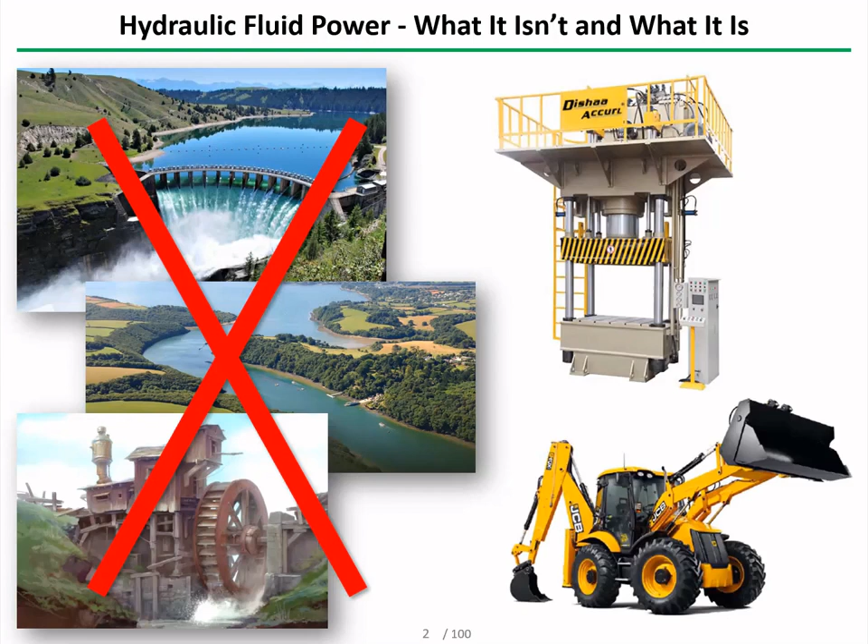Also, of course, in mobile applications, we've got things like JCBs and other diggers, we've got combine harvesters, we've got forklift trucks and so on. So it's the transmission of power, basically, which is why I tend to call it hydraulic fluid power rather than just hydraulics, to avoid any possible confusion.

So where did it all start? Well, I guess we can go back really to the ancient Greeks, the guy called Ctesibius, who was working in Alexandria in Egypt a couple of centuries BC.

And he was the guy who really invented what we call the positive displacement pump, or piston pump, as it's known today. Basically, he had two wooden pistons reciprocated by a hand lever inside two bronze cylinders. And by means of some leather flap valves on the inlet and the outlet of the device, he got a more or less constant flow of fluid out of the nozzle.

And then if we move on a couple of millennia, or a millennia and a half, Leonardo da Vinci got pretty close to describing hydraulic systems, but he had so many ideas and so many inventions up his sleeve that he didn't really have time to pursue it.

And then in Holland, Simon Stevin, around about 1586, really defined what we mean by hydrostatic pressure in a fluid and explained how it varied with the depth of the fluid.

But it was really down to the French philosopher Blaise Pascal in the middle of the 17th century, who stated that pressure is transmitted undiminished throughout a fluid and acts with equal force on equal areas at right angles to the areas. So basically what he was saying is that pressure can go around corners, if you like.

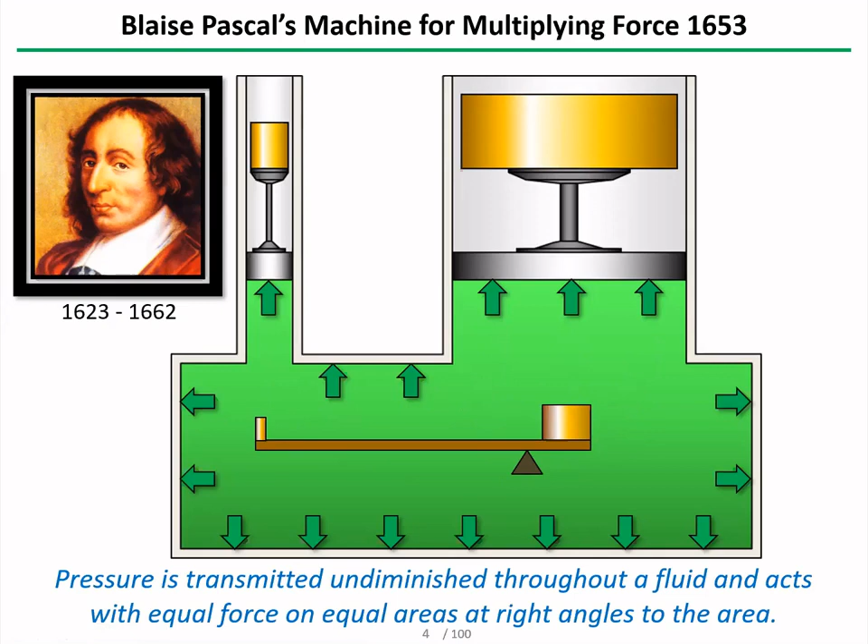So what he'd done basically was to explain the hydraulic equivalent of a mechanical lever. We can do exactly the same thing if we have a small weight acting on a long lever arm that can balance a much larger weight acting on a small lever arm. So that became known as Pascal's law, say in the middle of the 17th century.

Why it took quite that long is a bit of a mystery. Obviously, there were practical problems to overcome, such as the sealing of the pistons and this sort of thing. But they weren't enormous problems because, as we said, pumps had been made before with sealing leathers and so forth.

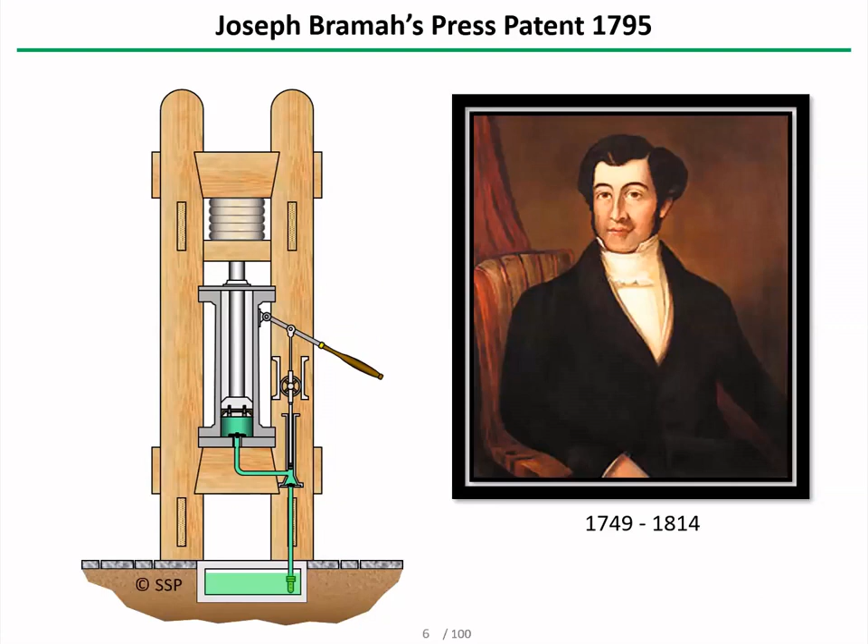But as we said, it was really Joseph Bramah who kicked off the whole hydraulic industry when he patented the first press in 1795. And to illustrate his press illustration, he used a pump piston diameter of 1/4 of an inch, acting on a larger piston in the center of the press, which is a 12-inch diameter piston, plus a bit of mechanical advantage from the lever on the press pump.

And he reckoned he could get an output from this press of just over 2,300 tons, which was pretty impressive from a wooden press. And if you work out the sums, that works out to a pressure of 46,000 pounds per square inch.

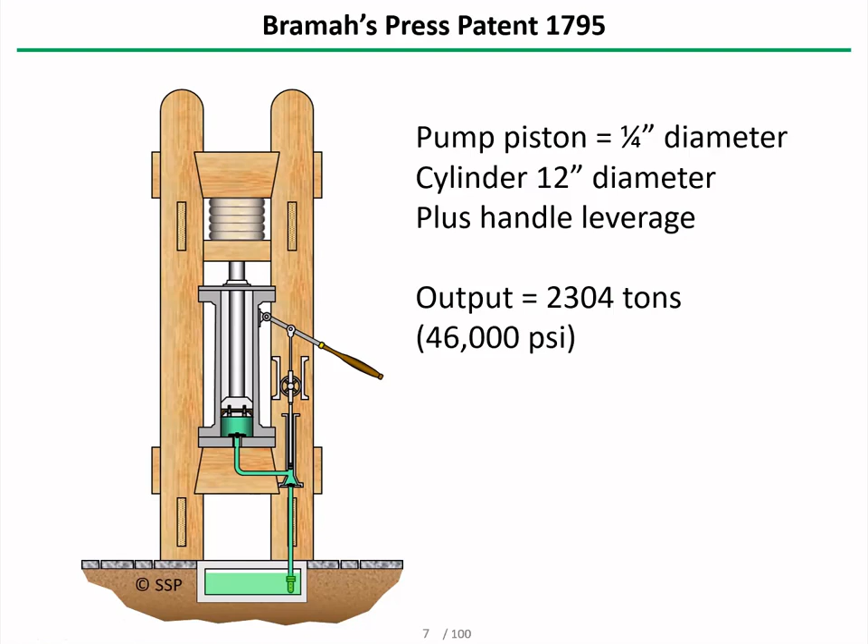Well, just to put that into perspective, the first aeroplane to use a hydraulic system at 5,000 psi was the Airbus 380, which first flew in 2005. Up to then, all aircraft had been using 3,000 psi systems. So for the very first hydraulic machine to use a pressure of 46,000 psi was perhaps a tad ambitious. But nevertheless, it was just an illustration in his patent application.

But probably more importantly, in the same patent application, Bramah illustrated another use of hydraulic fluid power, which was not just for force multiplication, but to actually transmit power over a distance. He illustrated a simple arrangement with a hand pump and a cylinder ringing a bell. And that really is the main use of hydraulic fluid power today, as a power transmission medium rather than just a force multiplier.

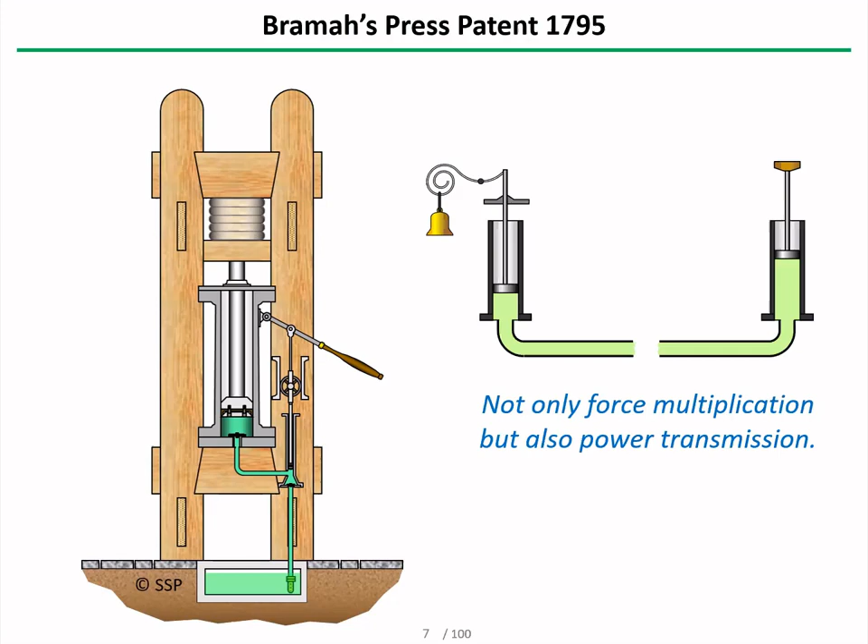In the early days of hydraulic fluid power, it was used in presses for squeezing things together, such as baling cotton, wool, hay and so forth, and later on for forging metals, as we'll see.

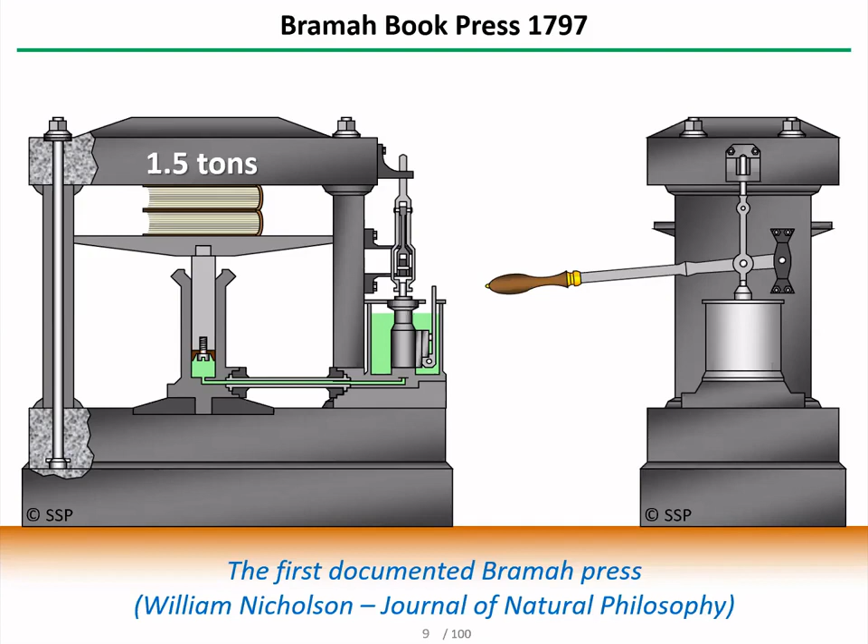A couple of years after his patent, in 1797, we know this was one of the first presses that Bramah actually made. His patent illustration was probably no more than that, just an illustration, but this one is documented in a book by William Nicholson. It's a much more modest affair than his 2,300 ton press - a 1.5 ton press used in the book manufacturing industry for pressing books together. Made out of cast iron, no doubt, rather than wood, but a much more modest machine to start off the whole industry, really.

These days, of course, you can dip down to Halfords and for 16 quid buy yourself something very similar to that, which works on exactly the same principle - just a simple little bottle jack with a hand pump, using exactly the same principle that Bramah used in his early presses.

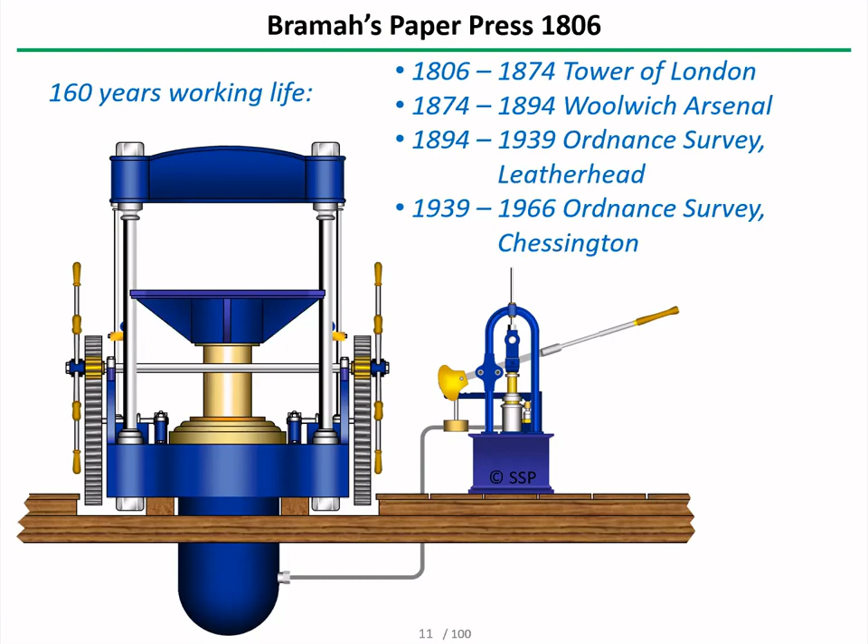We know quite a lot about this press because it still exists. It's been preserved, and it's now exhibited in the Kelham Island Museum in the middle of Sheffield. So it's not actually functioning, but it's still in good condition on display in that museum, which is well worth a visit if you're ever up that way, because they've got some impressive other things to look at as well.

When Bramah's patent ran out, everybody else seemed to jump on the bandwagon. Matthew Murray, for example, up in Leeds, came up with this double acting press, using basically a rack and pinion arrangement to get movement on both the top and the bottom platens, to save a little bit of time in the pressing process.

Also, downstroking presses came along as well. The advantage here is that you didn't have to lift up your bales of hay or wool or cotton, whatever it is you were compressing, up onto the top platen - you could do it more or less at floor level. But because cylinders were only single acting at that stage, you then had to find some way of retracting the piston at the end of the working stroke of the press. In this particular case, it was done by counterweights on either side of the press platen.

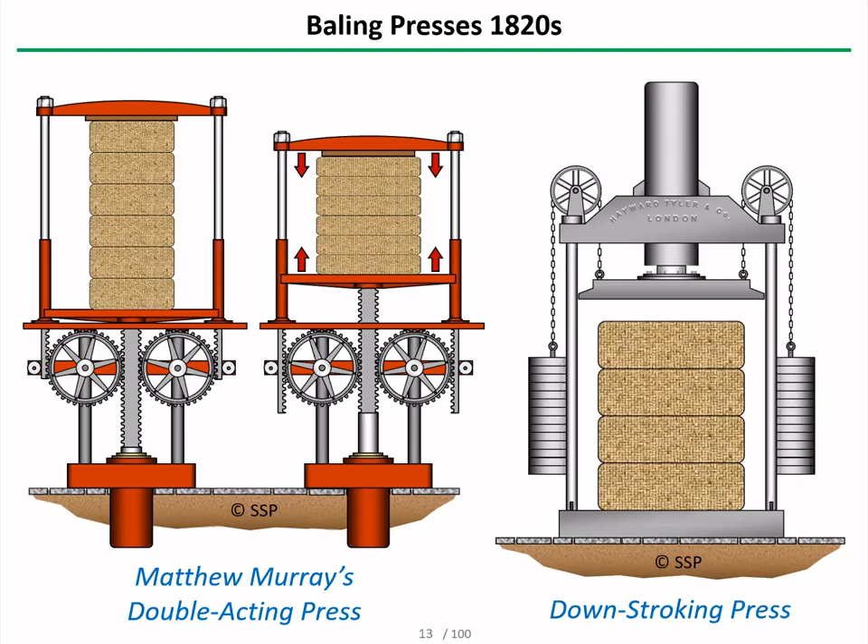So this was the other main use for hydraulic presses at that time - apart from baling up cotton and hay, extracting oil from seeds, where it was a more or less continuous process. Rather than having a poor chap pumping away on a hand pump all day long, they tended to connect the pump to an overhead line shaft so that they could mechanize the whole process, if you like.

This illustrates it a little further, where they've taken standard hand pumps, connected via a connecting link to an eccentric on the overhead line shaft, and got the whole process mechanized to be more efficient.

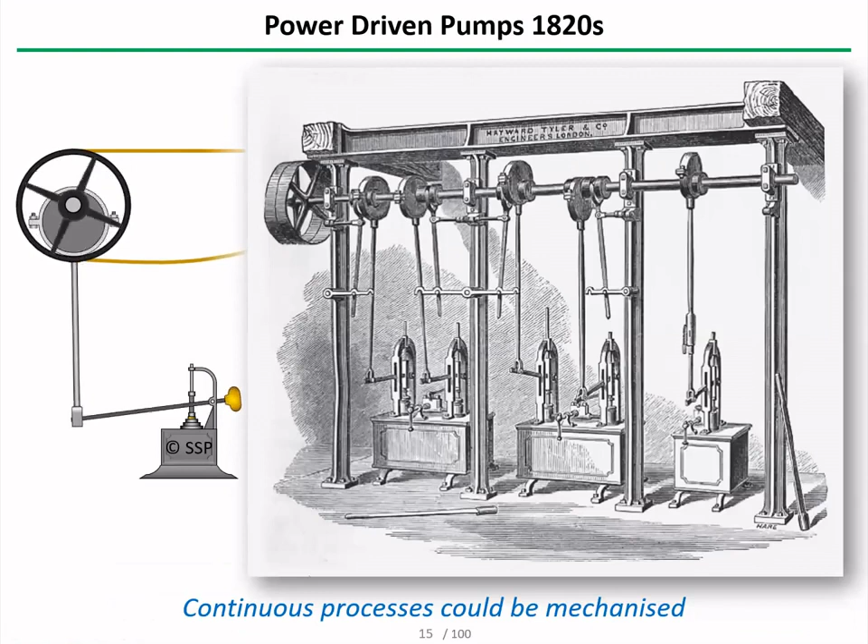Quite an interesting application came up in America with a guy called Joseph Francis. Wooden boats tended to dry out in the sun over time, so the planking shrank, and the first time you put the boat into the water, it tended to leak like a sieve - not one of the attributes you're looking for on a lifeboat.

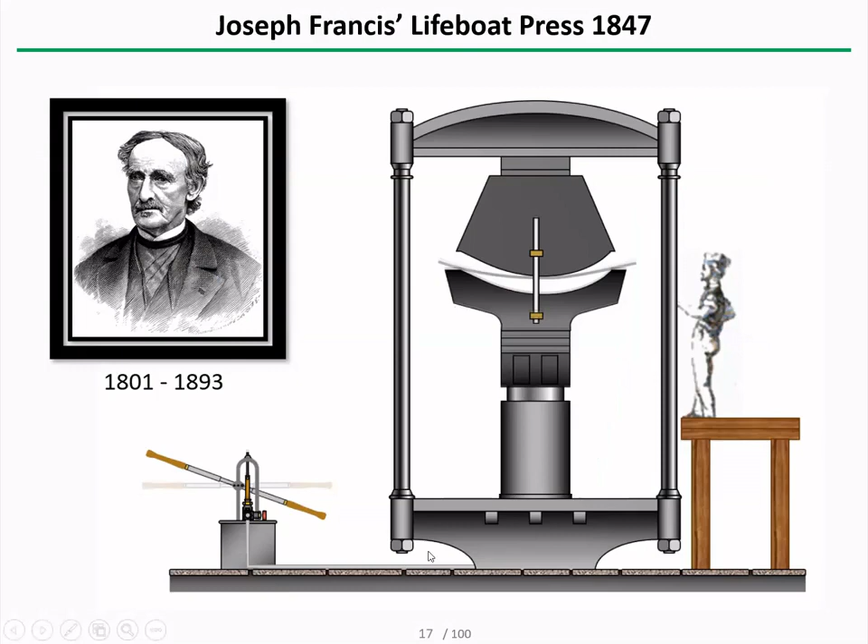So he came up with the idea of using a metal one, a corrugated iron lifeboat, made in a hydraulic press using a male and female mold, two halves operated by hand pump. The boat was made in two halves, then riveted together, giving him a lighter lifeboat that didn't dry out and leak.

Later on, things got a bit heavier, and in the forging of crankshafts for large steam engines, the Scotsman James Nasmyth came out with the steam hammer, basically a bigger version of the blacksmith's hammer. He used a steam cylinder at the top to lift a heavy weight, then with assistance from steam pressure, it came thumping down onto the component being forged.

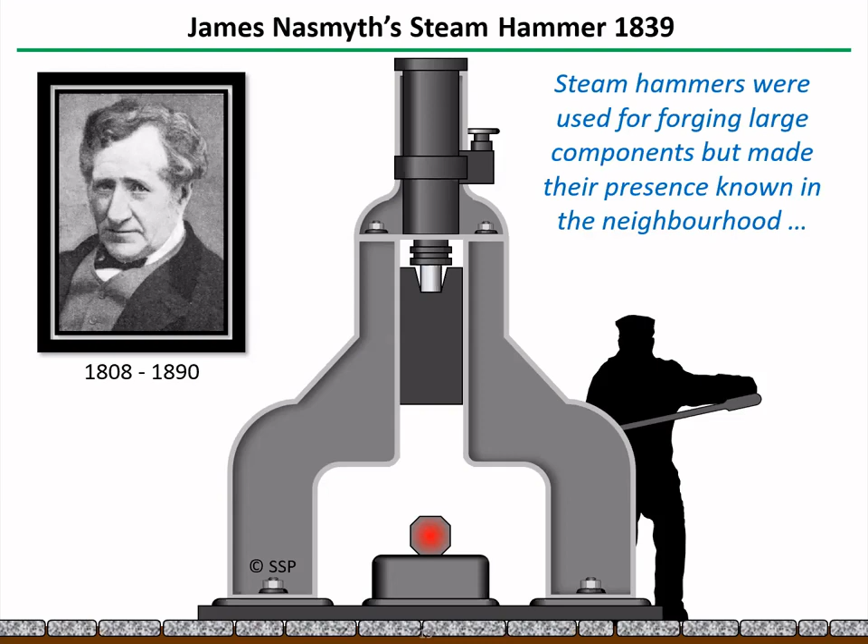You can imagine these things made their presence known in the neighborhood, with a 3 or 5 ton weight bashing down on a heavy forging several times a minute - then you knew the machine was operating. Especially at that sort of size, the largest steam hammer produced was a 125 ton version over in the States.

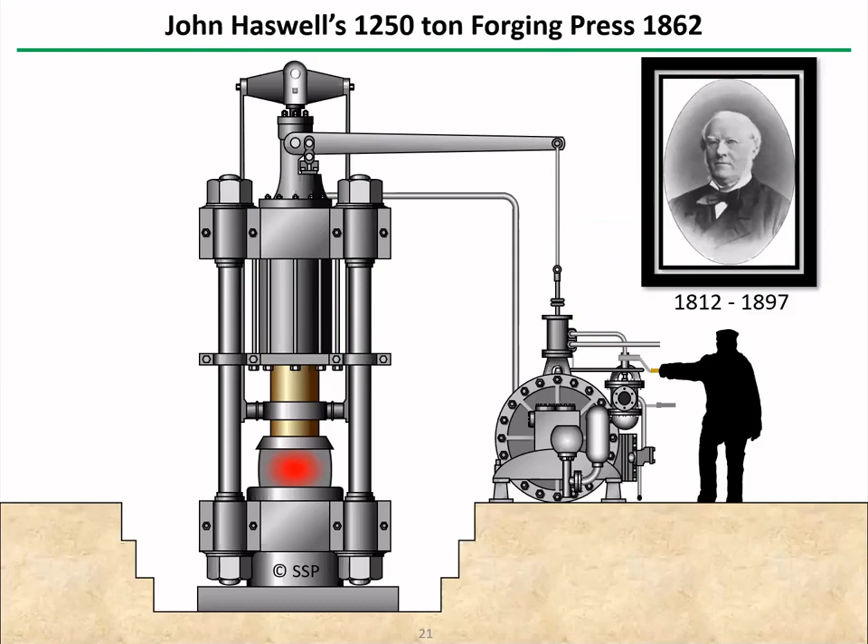So a guy called John Haswell came up with the idea of using hydraulics for the forging process. In conjunction with the Kirkstall Forge Company up in Leeds, he designed the first hydraulic open forging press in 1862, which instead of hitting the workpiece with repeated hammer blows, gave a nice steady squeeze to the component, giving a better quality forging and being less intrusive on the neighborhood.

In fact, it was stated that a lady in a muslin dress could stand close to it and incur no risk. These days, of course, the lady would also need a hard hat, high-vis jacket and safety boots as well. But there you are.

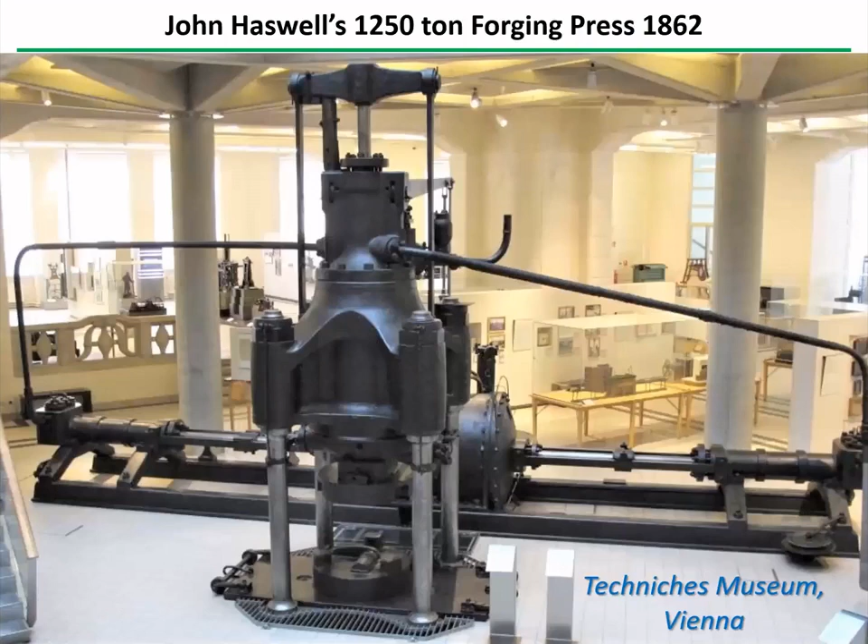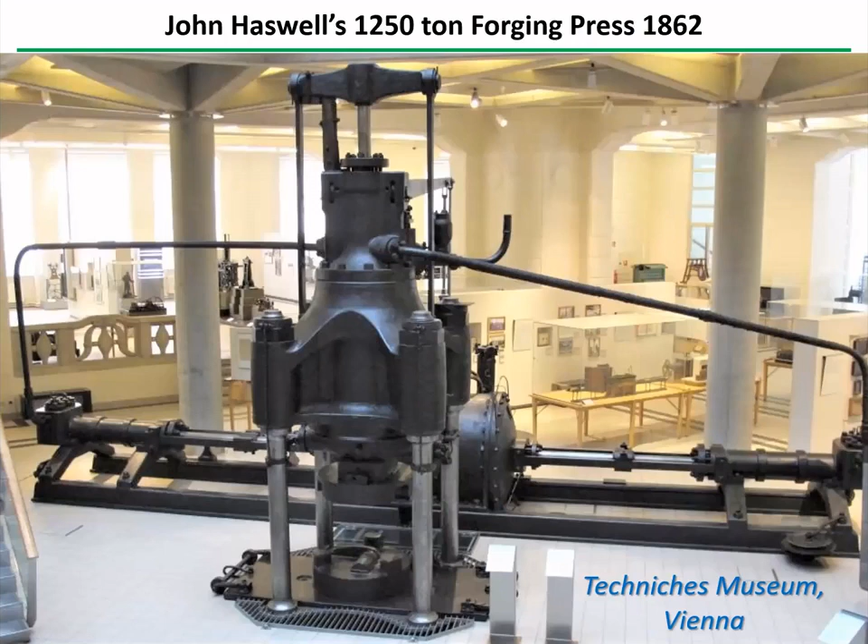We know quite a bit about Haswell's press because it still exists. He moved on to become superintendent of works for the Austrian railways, so he took his press with him, and it ended up in the Technisches Museum in Vienna, where it still resides.

The biggest press in the world today is one in China - an 80,000 ton die forging press, so not something you want to get your finger caught in. It's a huge machine, weighing 25,000 tons and absorbing something like 42,000 horsepower, operating over a pressure of just over 9,000 psi, with 5 main cylinders and 25 auxiliary cylinders for doing different things on the press. The compressed volume is something like 500 gallons.

That's not the volume of fluid in the press itself - it's the extra volume you have to squeeze in to build it up to 9,300 psi due to the compressibility of the fluid. People tend to think of fluids as incompressible, but they're far from it. In this case, you can squeeze an extra 500 gallons in, and in the process, the massive columns of the press stretch by over an inch. So it's a pretty hefty affair.

In fact, if you turned the whole thing upside down, you could quite easily lift the weight of the new Queen Elizabeth aircraft carrier together with a Type 45 destroyer placed on its deck. So, as we said, it's a pretty hefty piece of equipment.

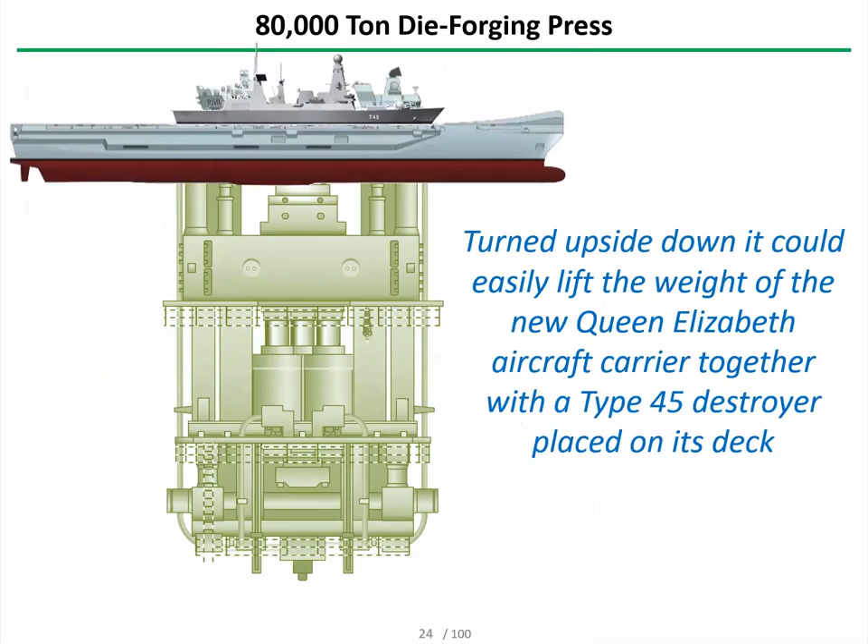As well as using hydraulics for presses, it was also employed for other uses, in particular for cranes. Bramah himself had designed and developed a workshop crane not long after his initial patent, using a rack and pinion arrangement with a hydraulic cylinder turning a winch drum for lifting components in his own workshop.

He stated it could raise and lower its load 15 or 20 times a minute to a height of 18 to 20 feet. If you do the sums, that works out to an operational speed of something like 13 feet per second, and probably sounds as feasible as his 2,300 ton wooden press.

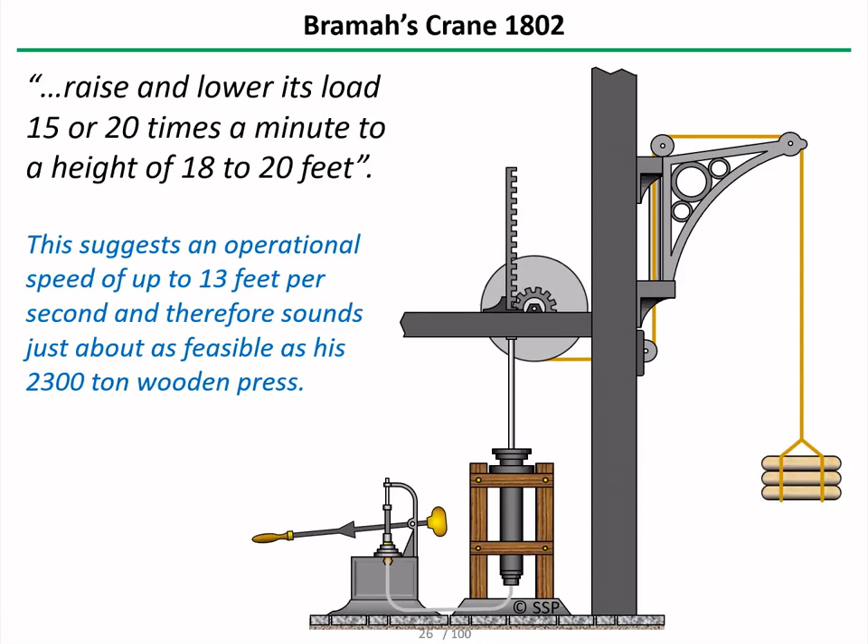So he was obviously a bit of an advertising man, was Joseph Bramah as well.

The man who really developed the hydraulic crane was William Armstrong up in Newcastle. This is really what set him off and became a huge business by the end of the century. He developed what's called the hydraulic jigger, basically a series of pulleys attached to a hydraulic cylinder, operating in the opposite way to a block and pulley. He uses the high force output of a hydraulic cylinder and multiplies the movement using the pulley wheels to get a larger movement out of the end of the crane.

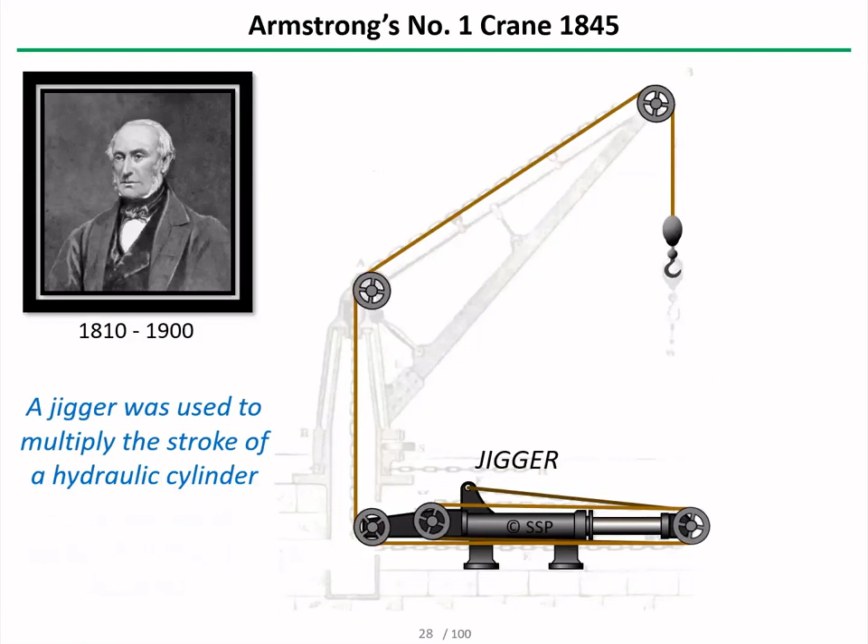Jiggers were also used on what's generally considered to be the first hydraulic excavator, developed by a guy called John Aird in 1882. It was used during the hydraulification of Hull's docks. I'm not quite sure if hydraulification is a word, but if electrification is, then I don't see why hydraulification shouldn't be.

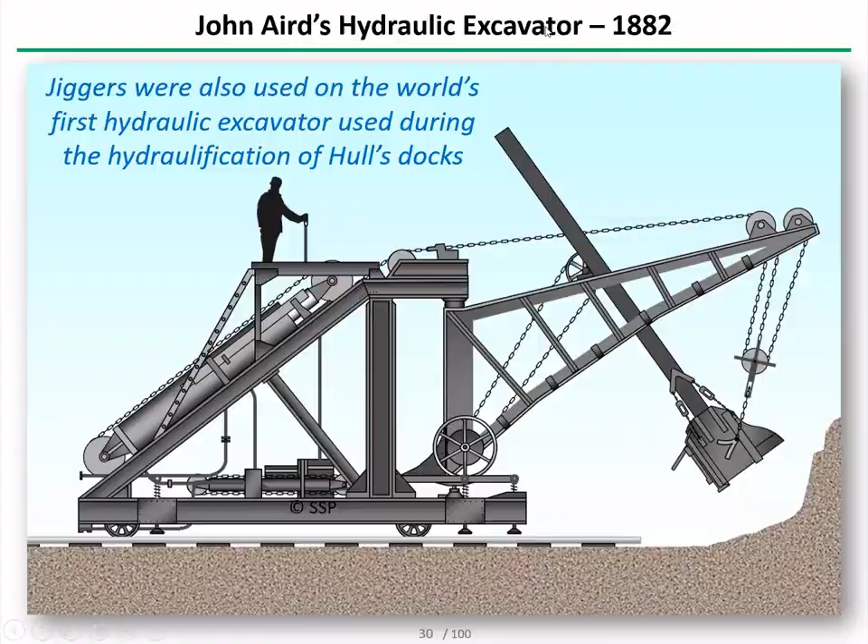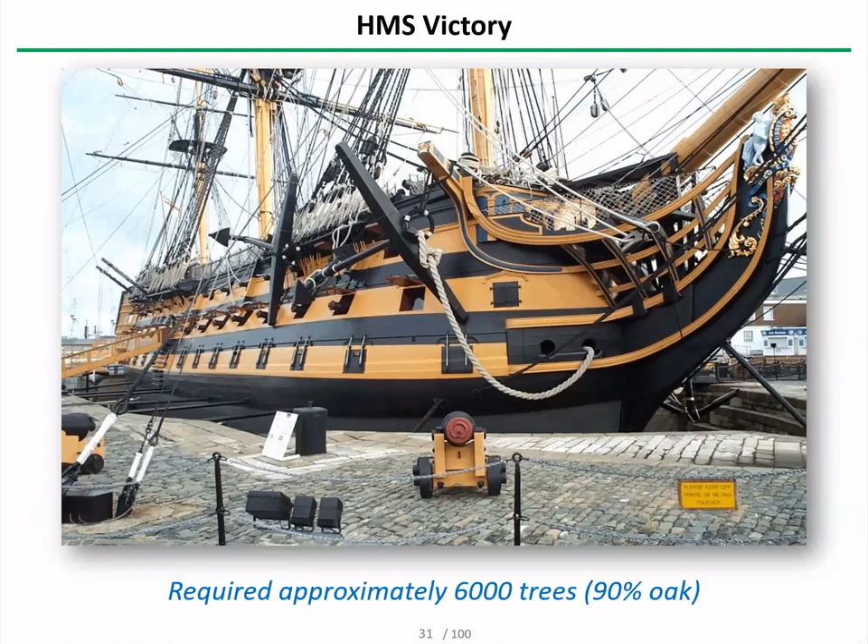You probably recognize that ship. If you don't, the title of the slide gives you a bit of a clue. But to build a big battleship like HMS Victory, it took something of the order of 6,000 trees, of which 90% were English oak trees. So it was a big requirement for wood in the end of the 18th century for shipbuilding.

And Bramah had the idea that, rather than chopping down the oak trees, which left a big stump in the ground and hindered the replanting process, why not just pull them up by their roots? He wasn't just talking about pushing them over, as we've illustrated here, but actually manually, bodily lifting the tree out of the ground by its roots.

And if you do the sums again, you'll find that he could well have done that. He had enough hydraulic force to actually bodily lift a tree out of the ground, and therefore not only provide more wood in the process, but clear the ground ready for replanting.

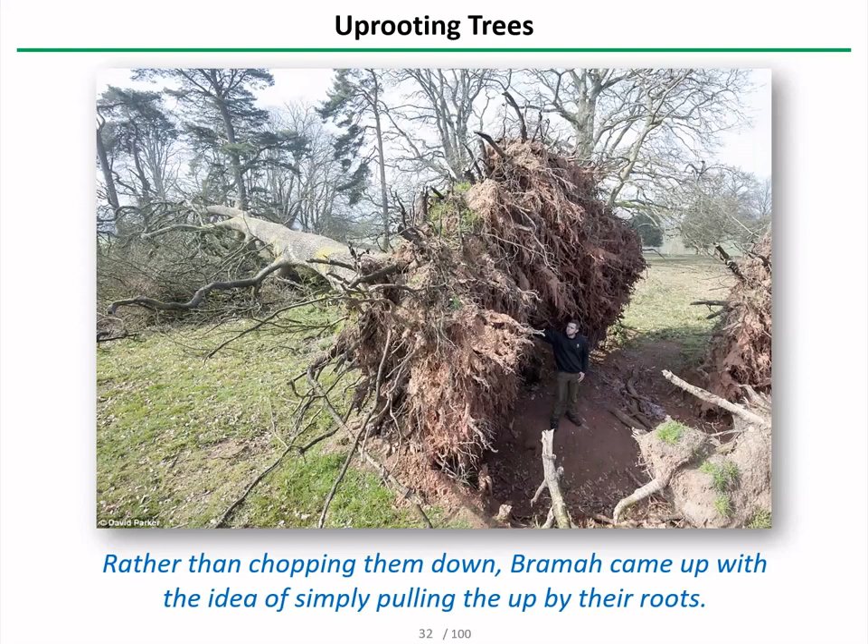The only problem is we don't know how he did it. There was a fire in Bramah's factory in 1843, and a lot of his early records were lost in that fire. So there is no record remaining, that I've been able to find at least, of exactly what this machine looked like for pulling trees out of the ground by their roots.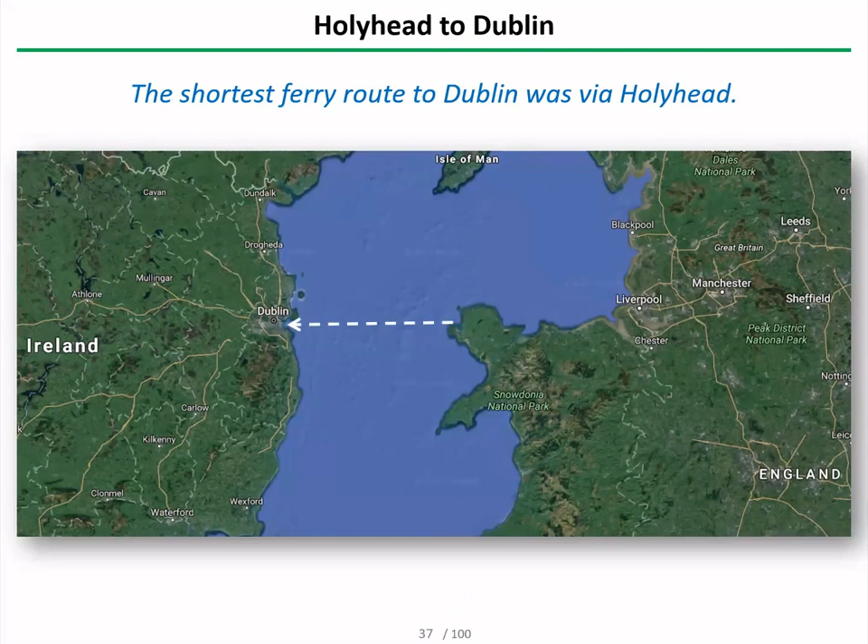Okay, so moving on to bridges. What's hydraulics got to do with bridges? Well, before we had air travel, if you wanted to travel from the mainland of Britain over to Dublin, the way you went was via sea from the port of Holyhead. And as you probably know, Holyhead is on an island. To get to the island, you have to cross a very narrow stretch of water called the Menai Strait.

Well, Thomas Telford had built a road bridge across the Menai Strait in 1826. But when they wanted a rail bridge, they thought that a suspension bridge probably wouldn't be stiff enough to carry rail traffic. So Robert Stephenson of railroad fame was engaged to design a rail bridge. After much deliberation and trial and error, he came up with basically what was the first box girder bridge, using a rectangular section tube strengthened by compartments top and bottom, and supported along the way by stone piers.

Each of the four central tubes was 460 feet long and weighed something like 1,500 tons by the time it was fully assembled. So you've got an up line and a down line, as you can imagine here.

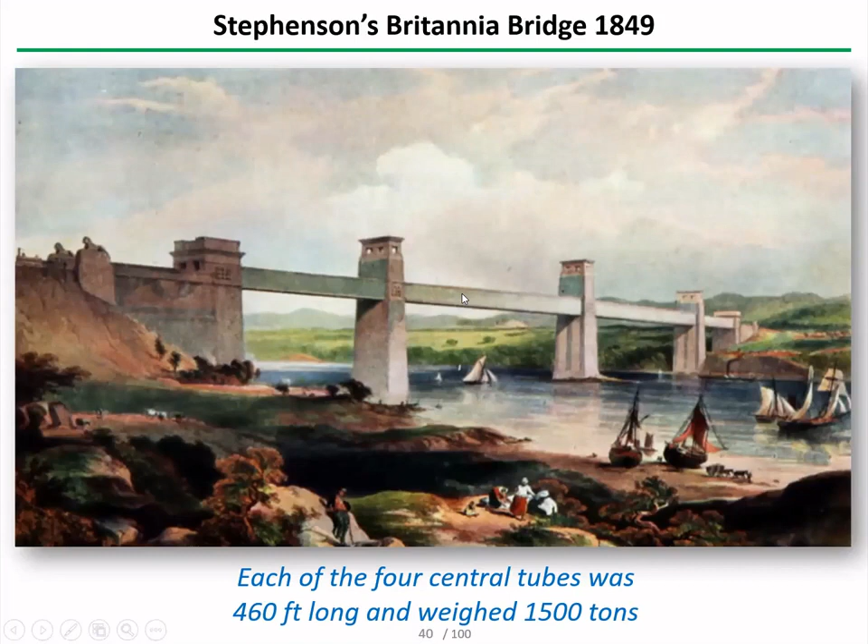They're fabricated on the shore because the Admiralty wouldn't let them put up scaffolding to impede the progress of ships through the strait for any length of time. So they were constructed on the shore in wrought iron sections being riveted together. They were then floated out on a couple of pontoons and then dropped onto specially built ledges built into the towers.

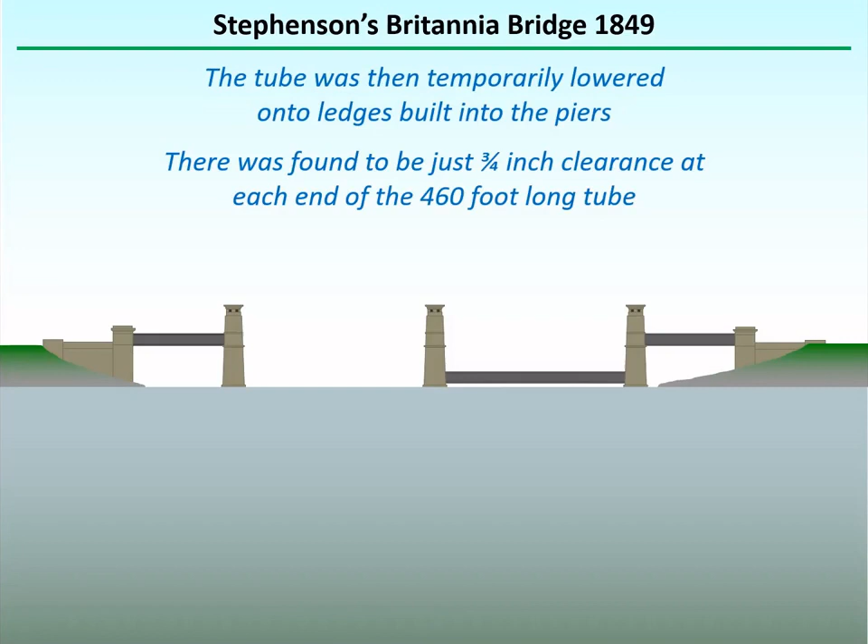When they dropped them onto the ledges, just as an indication of the sort of clearances that the Victorian engineers worked to, they found that over the 460-foot length of the tube, they had just 3/4 of an inch clearance at each end. So they were used to working to pretty close tolerances.

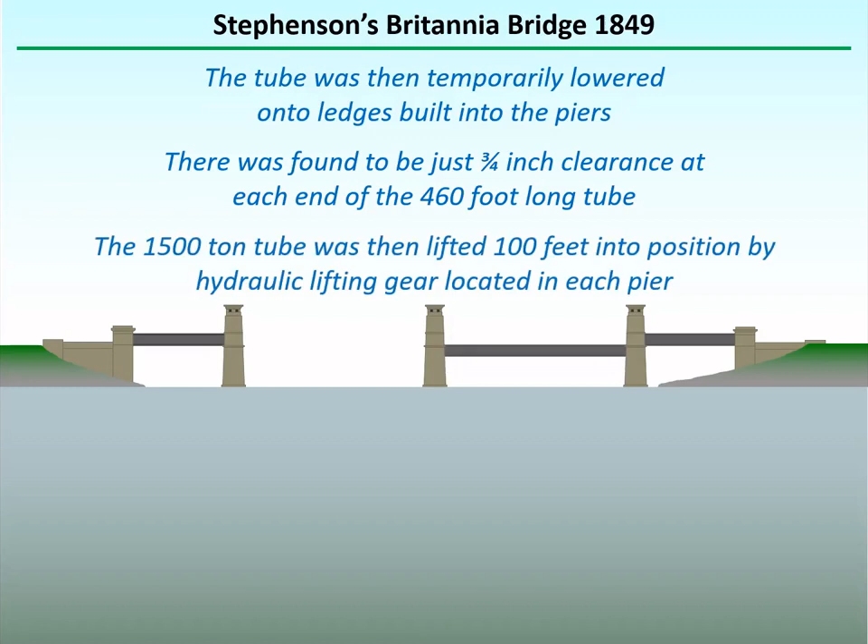All they had to do then was to lift the tubes up into position 100 feet above the high water mark. Again, they did that using hydraulic power. Each 1,500-ton tube was lifted 6 feet at a time by a big hydraulic cylinder, where each lift took about 45 minutes, pumps being operated by 2 steam engines.

The cylinders were pretty massive components. The ram diameter, the piston diameter in the cylinder was something like 20 inches and had a wall thickness of something like 11 inches, weighing a total of 16 tons. In fact, when they took them out of the mold, it took 3 days for the cylinder casting to cool down before they could machine it.

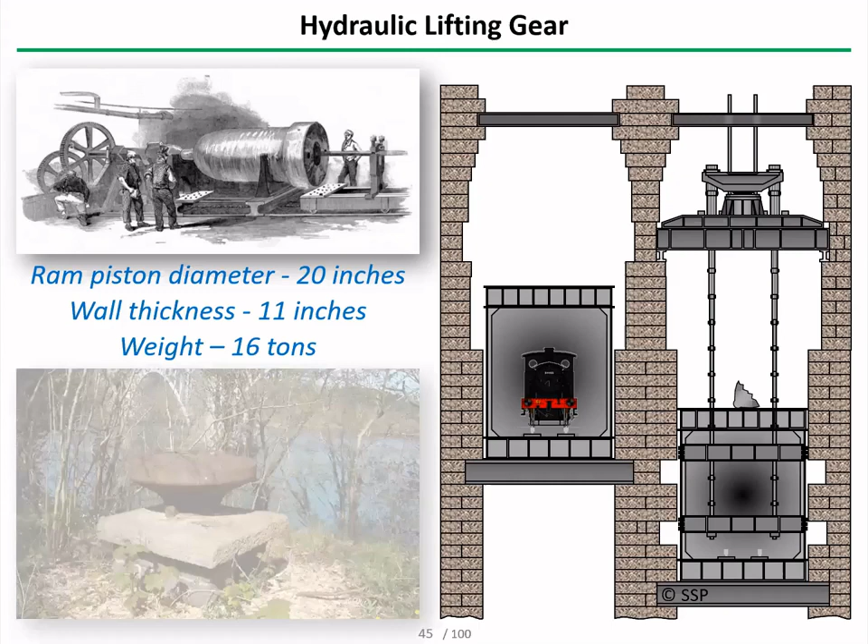But they weren't quite massive enough, because on the first lift of the first tube, they blew the bottom out of one of the cylinders with hydraulic pressure and dropped the tube something like 9 inches back onto the supporting beam. Again, we know that because the bit that blew out of the bottom of the cylinder is still there on the side of the Menai Strait.

The bridge took something like 4 years to build, employed an army of workmen, and cost almost £250,000 in 1850, which is something like £33 million in today's money.

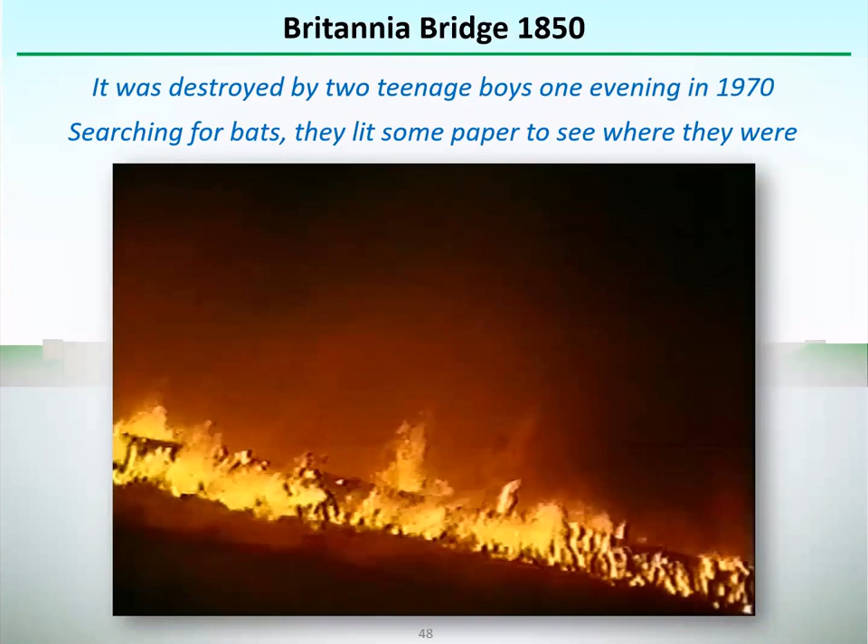But it was destroyed by 2 teenage boys one evening in 1970. They'd gone inside the bridge tubes to search for bats or something like that. I think they lit some paper to see where they were, and the tar inside the bridge caught light. It had a wooden ceiling, a wooden roof on the bridge, and that eventually caught light as well. So the whole lot went up in flames.

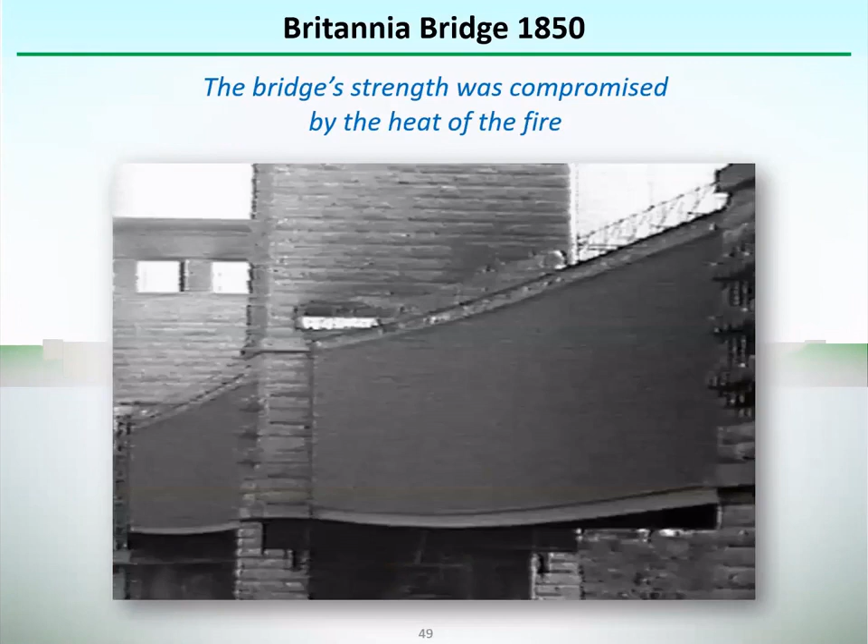The bridge's strength was really compromised by the heat of the fire, so they decided that they could no longer use it for rail traffic. So between '72 and 1980, it was rebuilt using steel arches, since it no longer was a requirement to have high-masted ships sailing underneath it as it was initially. But it lost a lot of its elegance in the process, I think. They also added a roadway to the top of it as well.

Okay, so hydraulics had been used extensively in the construction of bridges, but there are many bridges that actually move as part of their working life as well. In particular, the swing bridge across the River Tyne in Newcastle. This was built to enable Armstrong ships to pass - his factory was upstream of the bridge here - so it had to open to allow Armstrong ships to get access to the sea.

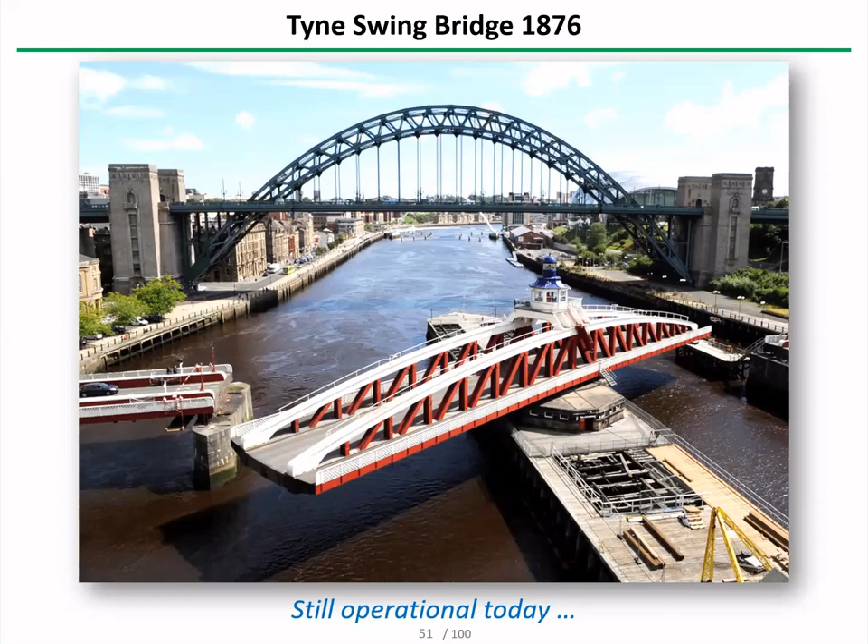Again, it was all hydraulically powered, and again, the equipment is still there, still in everyday use. Apart from the fact that the pumps are now driven by electric motors rather than steam engines, everything else is the original Armstrong equipment and still in full working order.

Perhaps the most famous moving bridge, though, is Tower Bridge across the River Thames in London. This consists of 2 bascules, one on either tower, which open and close whenever a ship taller than the bridge itself needs to go through.

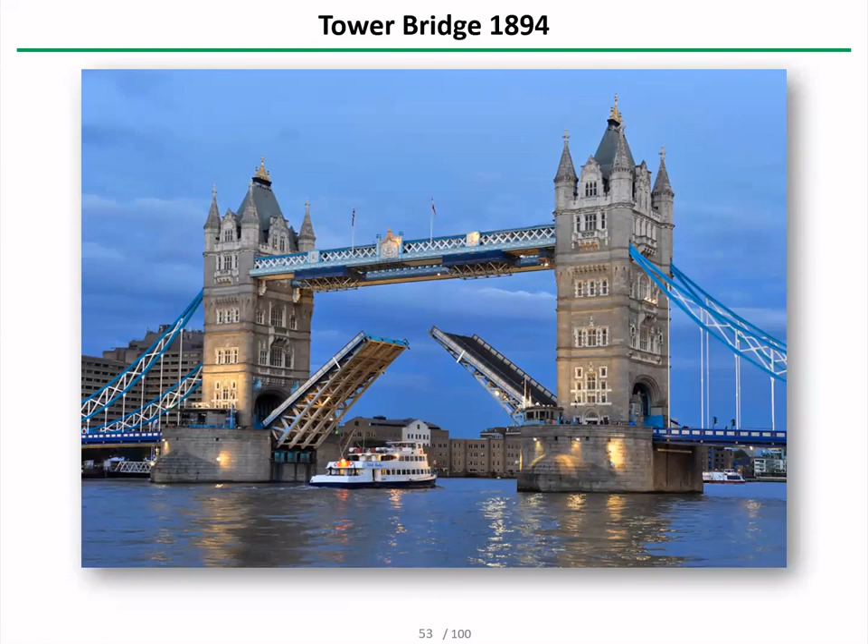They again are operated hydraulically. Armstrong again supplied most of the equipment originally for the operation of the bridge, and each bascule is counterbalanced by a heavy load on the rear of the bascule. It's opened and closed by means of a hydraulic motor acting on this curved rack arrangement - so it's a rack and pinion arrangement again, but using a curved rack rather than a straight one.

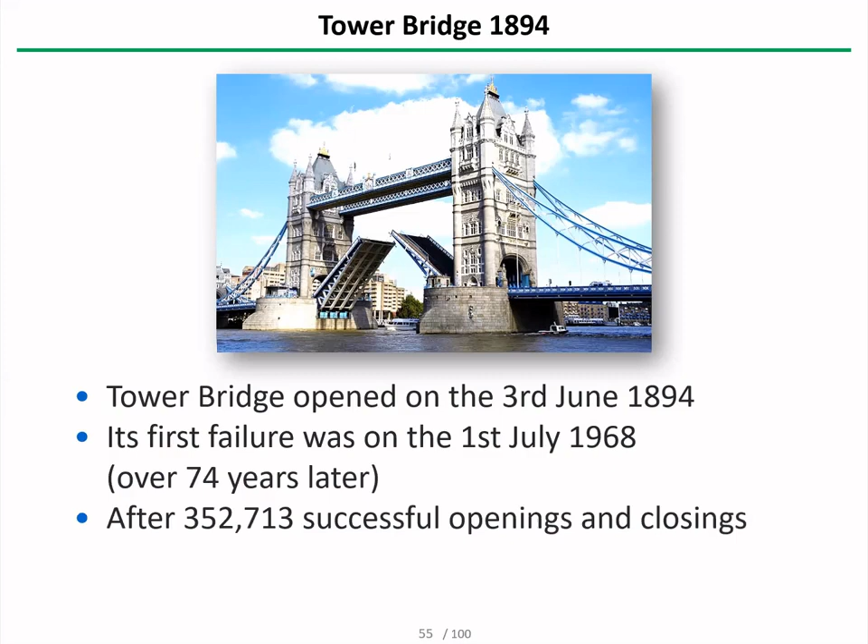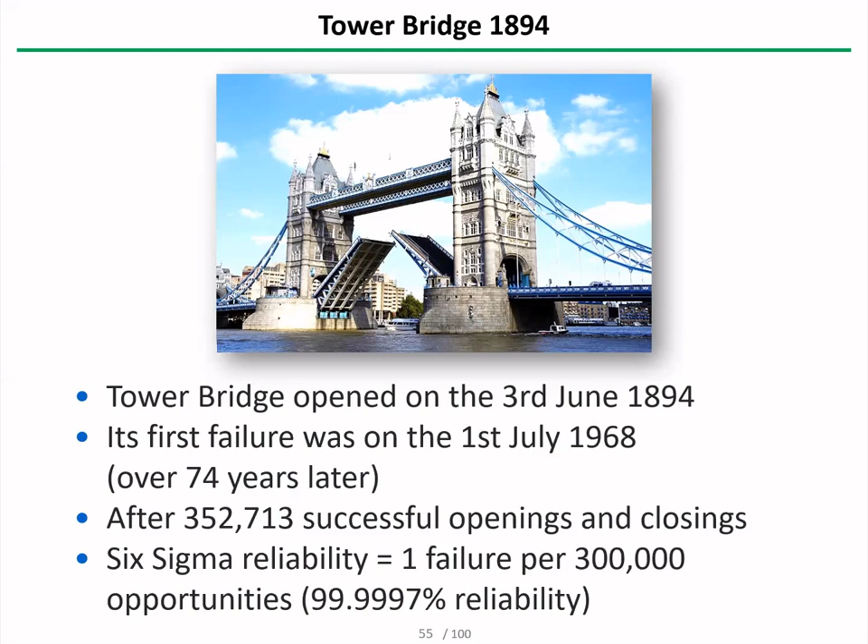Moving on to look at ships. When Brunel turned his hand to shipbuilding, the first one he came up with was the Great Western, 2,300 tons. It was meant to be the first steamship to cross the Atlantic, but as it turned out, it was the second, beaten by a day by one of his rivals.

Around about 7 years later, he came up with the Great Britain, which was larger still. This is the one that was scuttled in the Falkland Islands for many years, then towed back to the UK in 1970, subsequently restored, and now resides in the dry dock where it was built in Bristol.

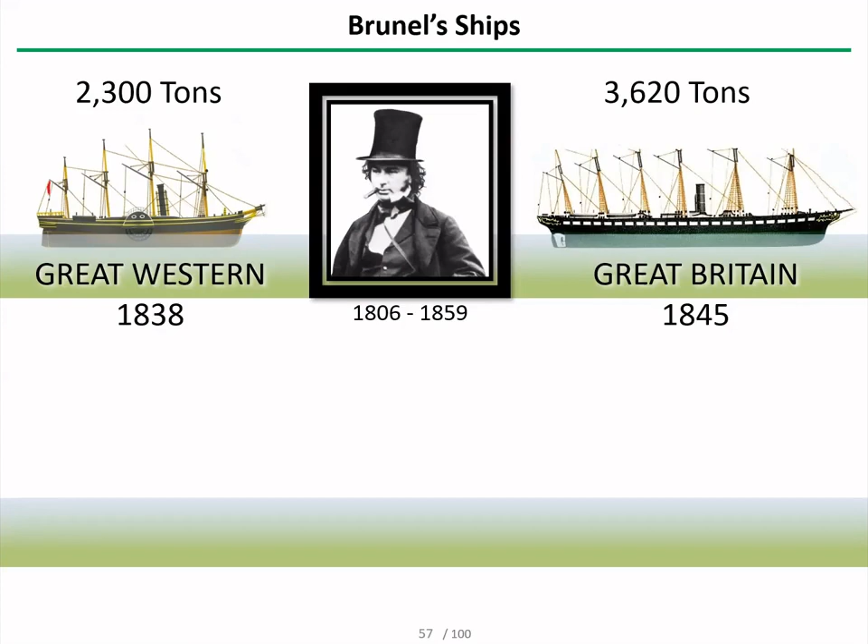But both of those were mere tiddlers compared to what was going to be his crowning glory, the Great Eastern, 1859, which was 19,000 tons. That was built on the side of the River Thames in Millwall. It suffered from no end of problems, economic problems with companies going bankrupt and so forth. But eventually he got it finished, and one of the cutbacks that had been made was in the launching equipment.

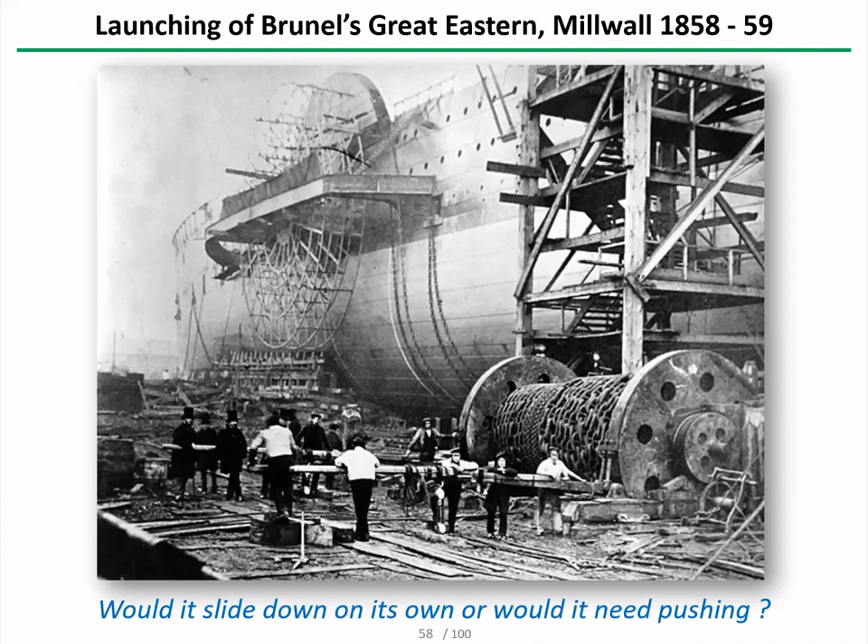So when they took the chocks away, they weren't quite sure whether it was going to slide down the slideway on its own, or whether it would need coaxing and shoving and pushing down there. When they took the chocks away, it slipped a few feet, then stopped. So they got their answer then - it was going to need pushing. So they scoured the country for every hydraulic cylinder and every hydraulic pump they could find.

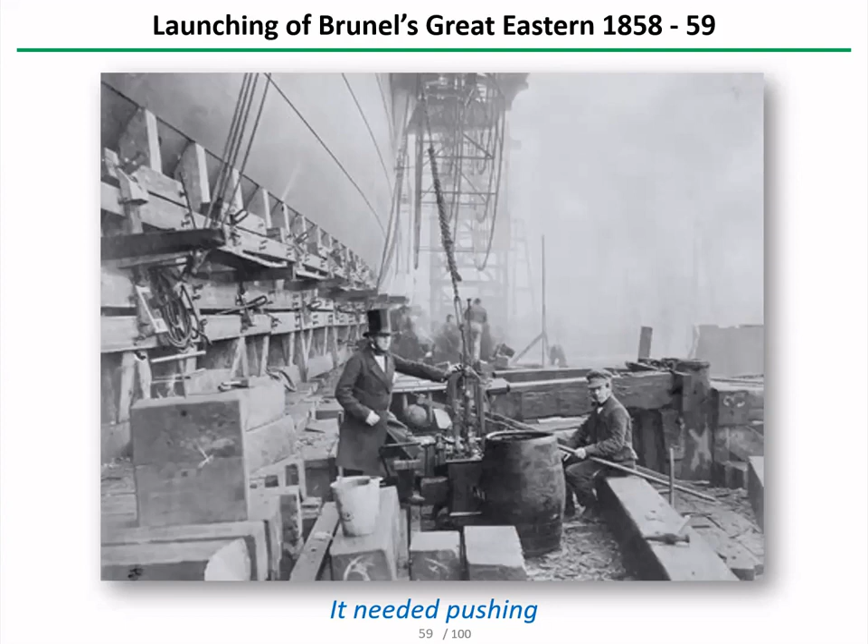Robert Stephenson even loaned Brunel the cylinders he'd used for lifting the tubes of the Britannia Bridge. So inch by inch, they hydraulically pushed the big ship into the water, but it took them about 3 months to do so. Finally, in the January of the following year, they got it into the water and floated away.

Henry Bessemer also came up with a rather interesting design for a ship. He'd had the idea of creating a mortar shell that would spin and therefore improve its accuracy, but without using a rifle barrel in the gun barrel. He used basically some drillings in the mortar shell coming out at a tangent, so that the explosive gases would actually act to spin the shell as it left the barrel.

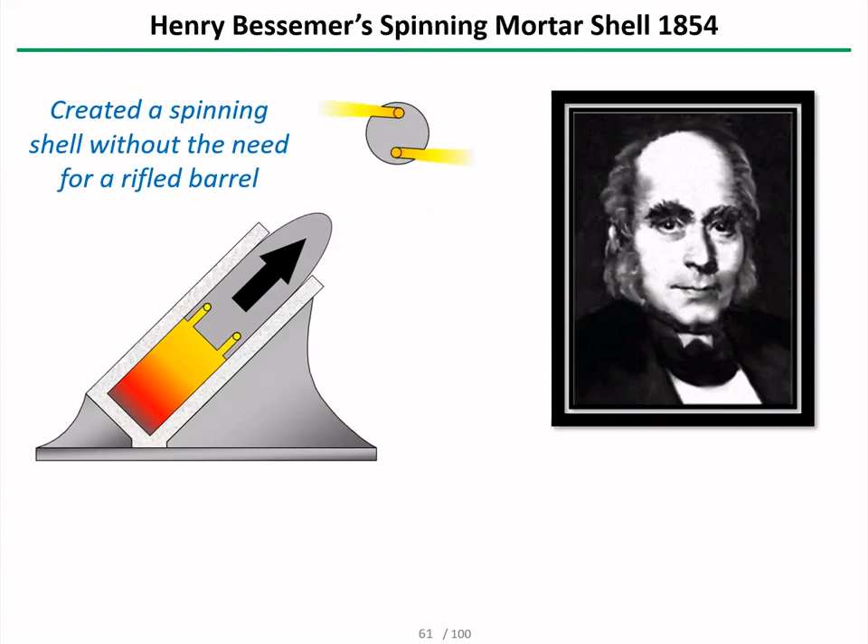He tried it out in his back garden, and it was stated that the gun was fired at an angle of 45 degrees. The projectile reached an estimated height of 200 feet and revolved like a Catherine wheel before hitting the ground, still within the boundary of the garden. So obviously Bessemer had a decent size back garden.

He took the idea to the War Office, but they weren't really interested in it. So he took the idea across the channel to the French, who were fighting on the same side as us at the time. They were interested, but they reckoned their cast iron guns weren't strong enough to make full use of the idea.

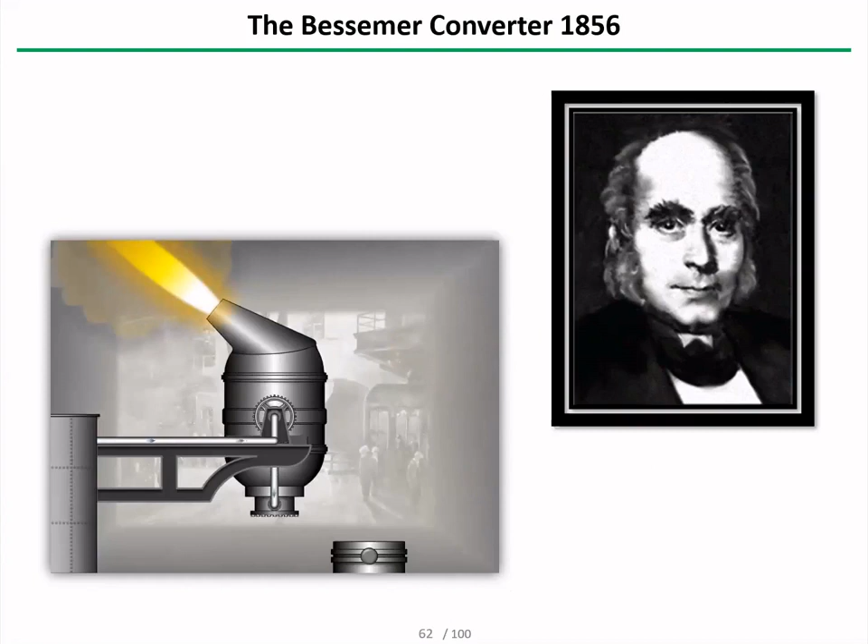So with no doubt a sigh, he came back and basically invented the mass production of steel to get around that problem the French had with their guns. He designed a big converter vessel, inevitably known as the Bessemer converter, which was filled with molten iron initially, and then air was blown through it for about 20 minutes or so. The whole vessel was then tilted up on its end to release the molten steel into a ladle. Again, a pretty hefty piece of equipment that had to be moved or spun round, so again he employed the use of hydraulics to do so.

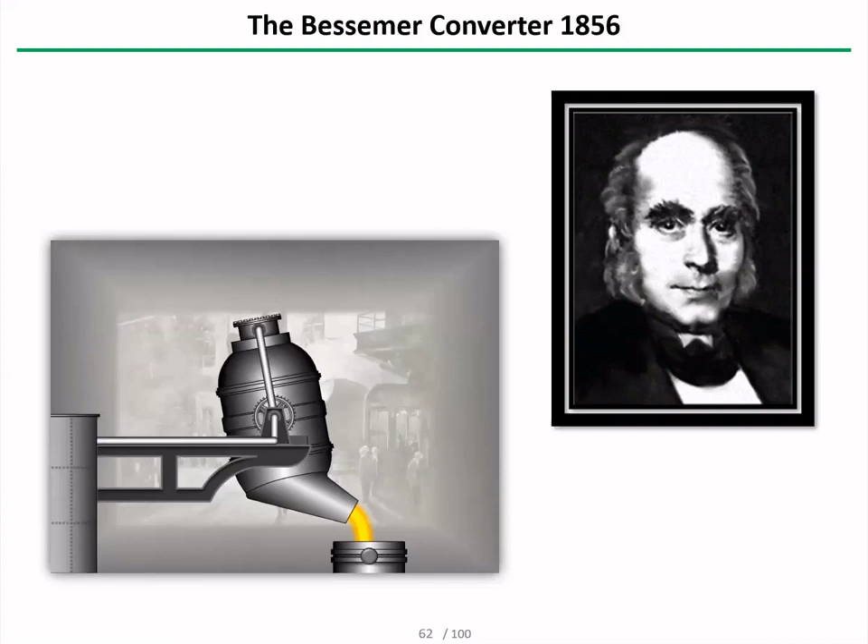5 or 10 tons of fluid metal had to be lifted in one direction, this load diminishing until the fluid running to the opposite end of the converter tended to reverse the driving gear. If anything went wrong or slipped, the converter might swing itself round and discharge the incandescent metal onto the floor or among the work people.

So basically what he did was to use, again, a rack and pinion arrangement with a hydraulic cylinder, this time with the rod of the cylinder stationary and the outer casing, the cylinder barrel, being the moving component. And as he stated, these considerations led me to adopt the hydraulic apparatus now universally employed for governing the motions of the converter.

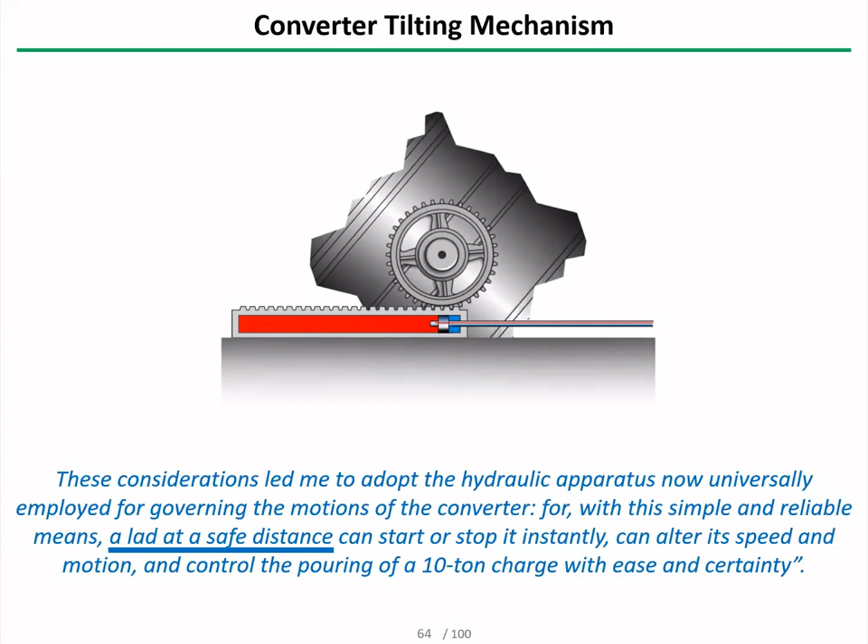With a simple and reliable means, a lad at a safe distance can start and stop it instantly. You can alter its speed and motion and control the pouring of a 10-ton charge with ease and certainty. So this is obviously the beginning of the health and safety regime, because the lad who was operating this was located at a safe distance.

Anyway, what's this got to do with ships? Well, in the process of selling this idea to the French, he was traveling backwards and forwards across the channel quite regularly, and he wasn't a very good sailor. He suffered from seasickness quite a lot.

So he designed and built a steamship which would counteract the effect of seasickness by having a cabin in the center, which was hydraulically operated either side, and therefore could counteract the effect of the ship rolling.

He tried to do it on the pitching motion of the ship as well, but that proved a bit too complicated. So he resigned himself to just compensating for the roll of the ship by 2 hydraulic cylinders operated by a sailor using an equilibrium valve, as he called it, which was so easy of motion that a child could work it, especially if they'd had experience of controlling 10-ton converter vessels, no doubt.

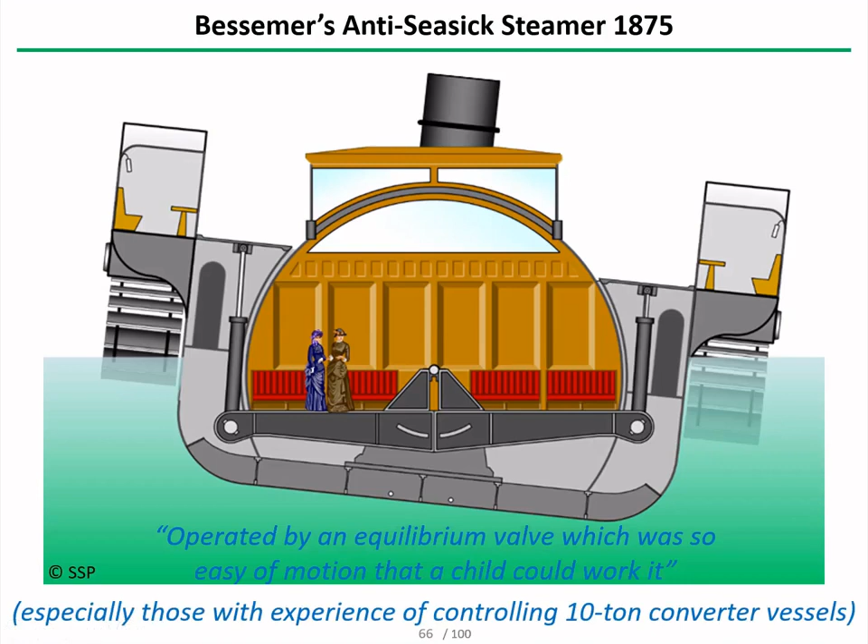To counteract the effect of the pitching of the vessel, he made it as long as he possibly could, 350 feet, which was then too long to turn round in Calais Harbour. So he built it double-ended with a bow on either end so it could sail backwards and forwards across the channel without having to turn round.

But it wasn't a huge success. It did actually cross the channel. It wasn't really rough enough to try out his cabin, so he scrapped it off at the end of the day.

You may remember a few years back, a ship called the Costa Concordia capsized and sank off the coast of Tuscany. Well, again, it was hydraulics that was used to bring that back to an upright position, mounted onto a cradle, which was built underneath to stop the whole thing slipping down further into the sea.

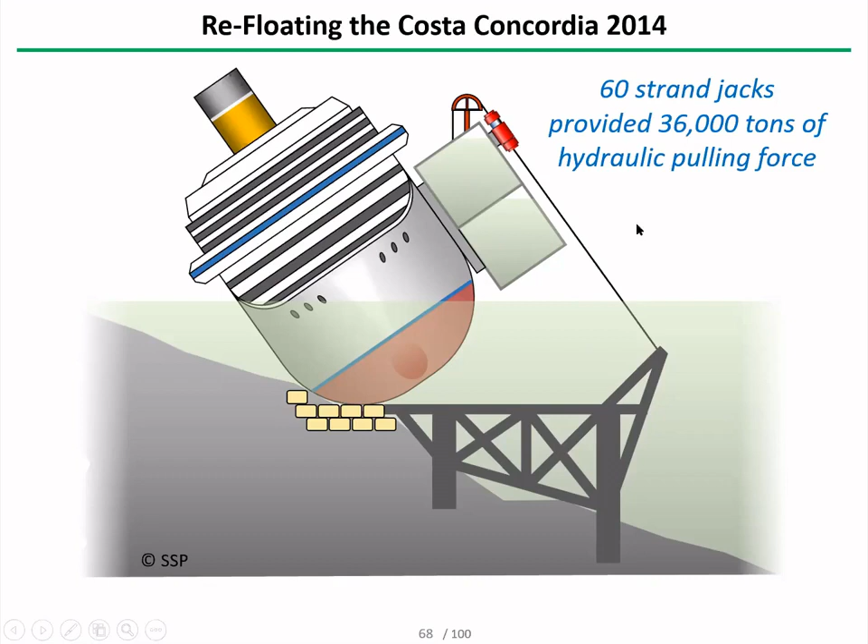They welded caissons on the side, filled with seawater to try and bring the thing back to an upright position. But in addition to that, they used something like 60 strand jacks, creating 36,000 tons of force to also pull the thing back to an upright position.

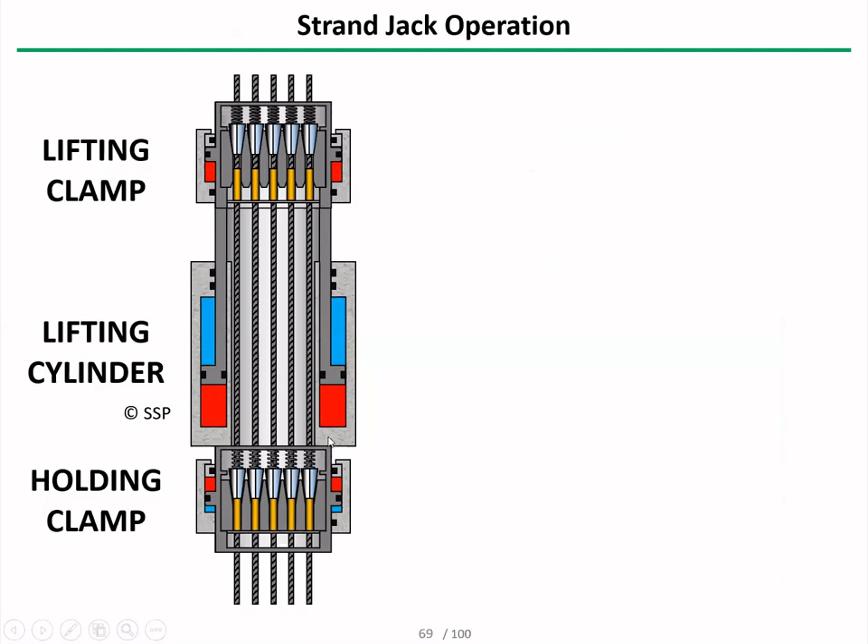Strand jack is quite a simple device. It's a hydraulic cylinder in the middle here with some hydraulic clamps top and bottom. And it uses exactly the same principle that Stephenson had used for lifting the tubes of the Britannia Bridge. You clamp at the top, pull up the wire ropes through the device. The cylinder then retracts, you undo the clamp at the bottom, clamp at the top, and pull the rope up a bit further. So bit by bit, you can lift whatever it is you're wanting to raise.

So exactly the same principle that Stephenson had used to lift the tubes of the Britannia Bridge.

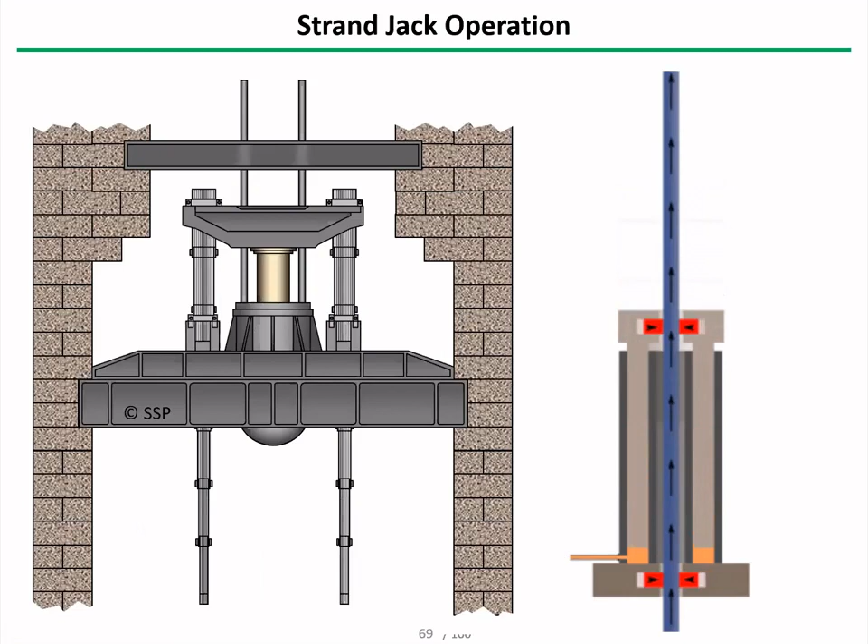And the ship could carry something like 700 people at a time. They didn't have video projection in those days, so to create the illusion of movement, he had two very large rolls of canvas either side of the ship, which were rolled up on these rolls at fore and aft, painted with appropriate scenery, and these were gradually rolled across to create the illusion of movement.

And there was a bit of smoke and steam blown across it as well, some thunder and lightning created, and a faint smell of seaweed and tar, all to create the illusion of sea travel.

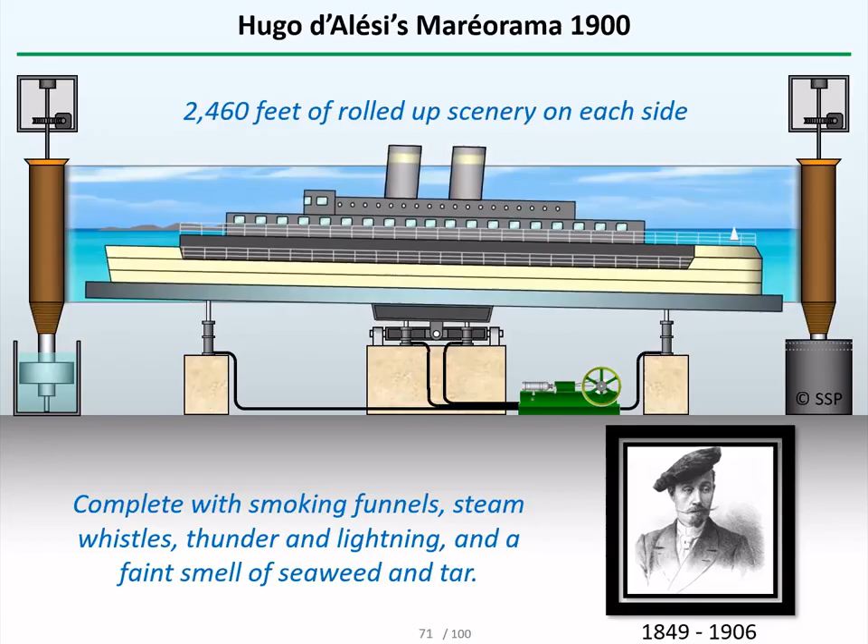So that was known as the Maréorama, say in 1900.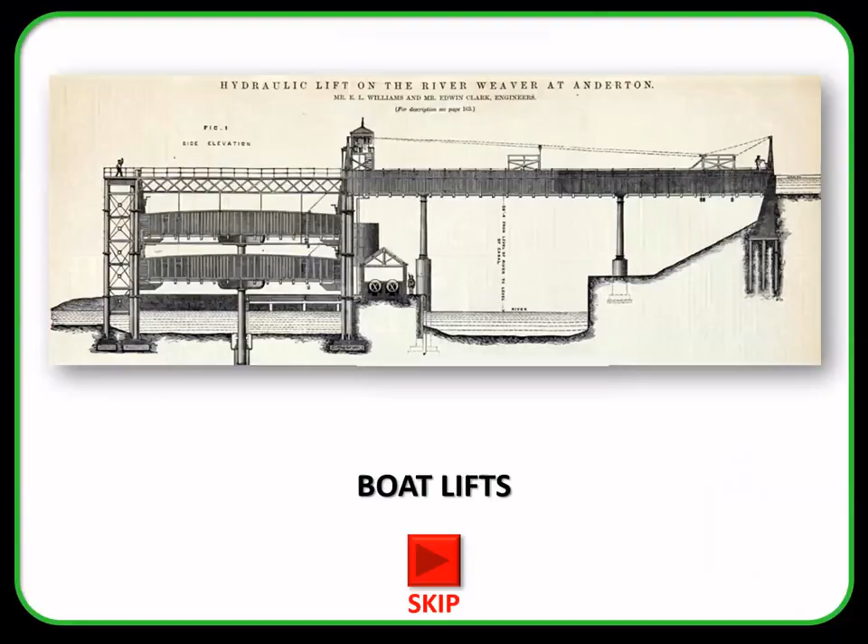Boat lifts for lifting boats between waterways. One that's recently been returned to operating condition is the Anderton boat lift up in Cheshire, not far from Northwich, which links the River Weaver to the Trent and Mersey Canal. It basically used two pontoons which were interlinked, so the weight of one pontoon lowering would more or less balance the weight to be lifted in the other. It was hydraulically operated initially with two large cylinders underneath, but they gradually got corroded and it was replaced by electric drive. It's now been fairly recently restored to hydraulic operation again.

And the other famous boat lift, I guess, is the Falkirk wheel, coming a bit more up to date. This one links the Forth and Clyde and Union canals up in Falkirk. A unique design, really - it's a rotary boat lift, but again hydraulic power is just used to turn the thing around, to overcome wind forces and a bit of friction and so forth.

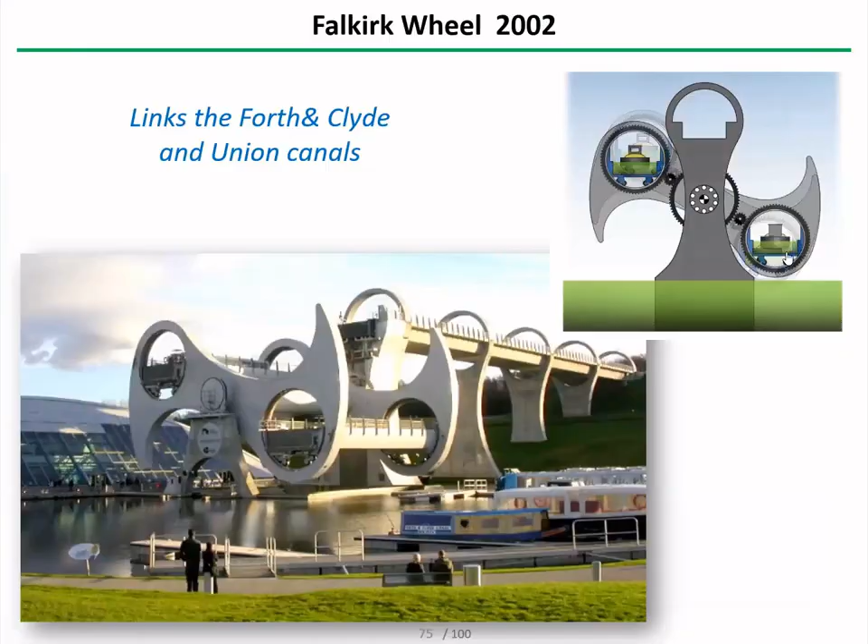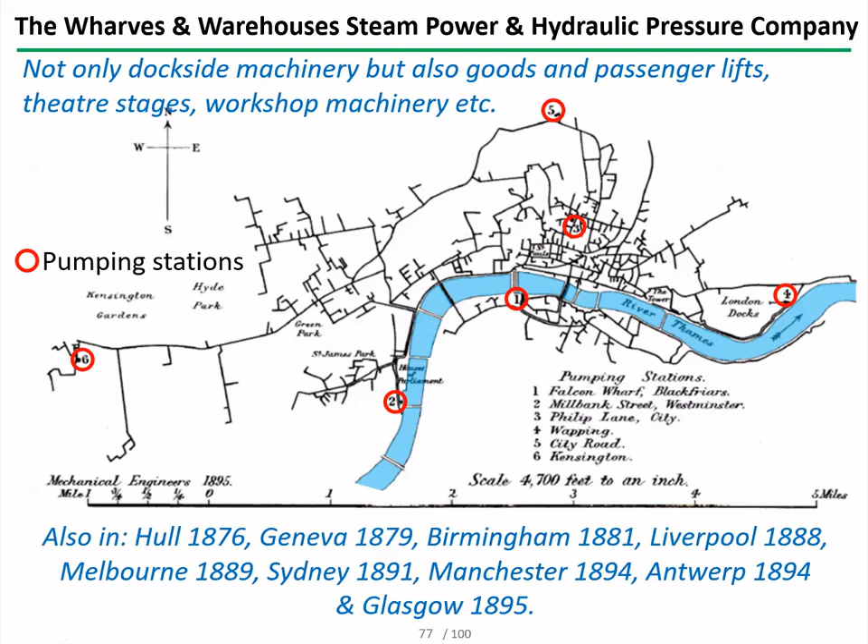One of Bramah's ideas was to have complete hydraulic ring mains. Initially he envisaged them running around dockyards and so forth, but eventually these got big enough to run around complete cities, notably London and Birmingham, Liverpool, Manchester, and so forth. This shows you the map of the largest one, which was known initially as the Wharves and Warehouses Steam Power and Hydraulic Pressure Company, but fortunately they changed their name shortly afterwards to the London Hydraulic Power Company. This was a map of what they eventually looked like in terms of their network of hydraulic pipework, operating at something like 700 PSI through 6 or 7 pumping stations. So it was quite an extensive network, really.

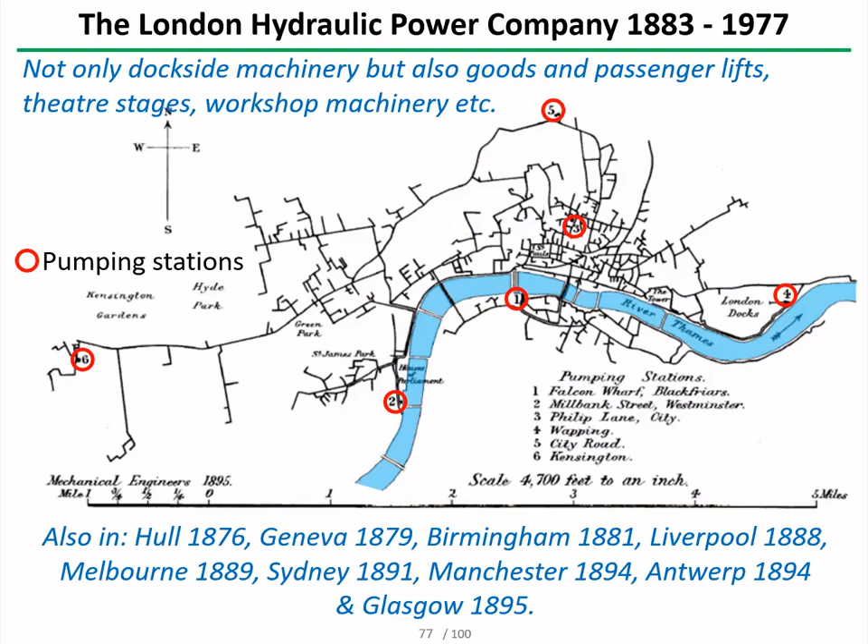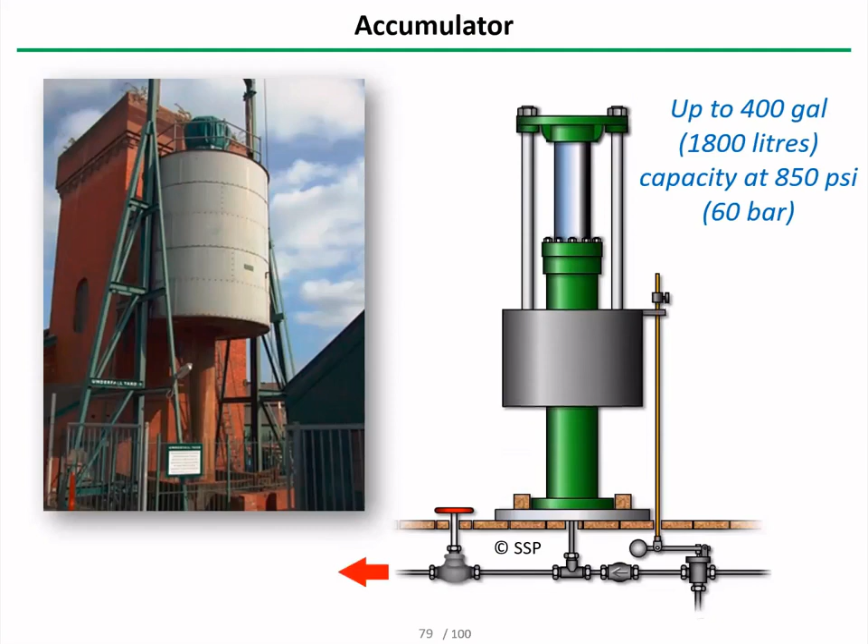That was connected to a hydraulic motor, which was basically the same thing on the other end but operating in reverse. In the case of a motor, you're supplying fluid to it under pressure in order to turn the shaft round. So by varying the angle of the swash plate, they could vary the amount of fluid that was pumped and therefore vary the speed of the motor on the other end. And if they go over center on the swash plate, they can actually reverse the direction of the motor. So what they ended up with was a variable speed drive, which was not only variable speed but also reversible as well. The motor had a fixed angle plate on the left-hand side, but the pump swash plate was variable, could be tilted backwards and forwards.

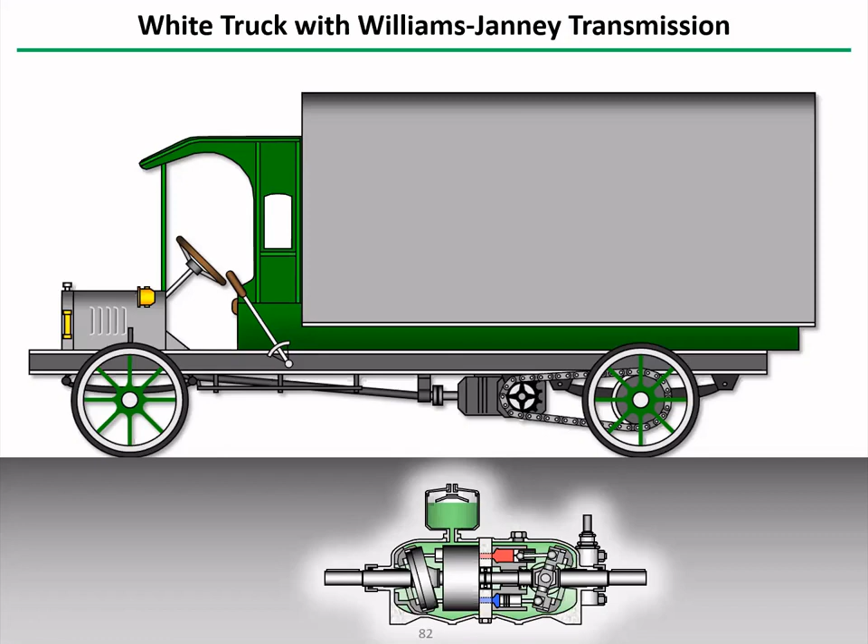But it did find a use on ships for rotating the gun turrets on battleships and so forth, and that's really when this technology took off. It was also tried out on some of the heavy tanks at the end of World War I, right at the very end of the war.

These tanks were driven by a huge petrol engine, something like a 19-litre petrol engine. In the mechanical drive arrangements to turn the tank, to steer it, you had to declutch one of the tracks and probably stop it in the process, turn the tank round, and then set off again.

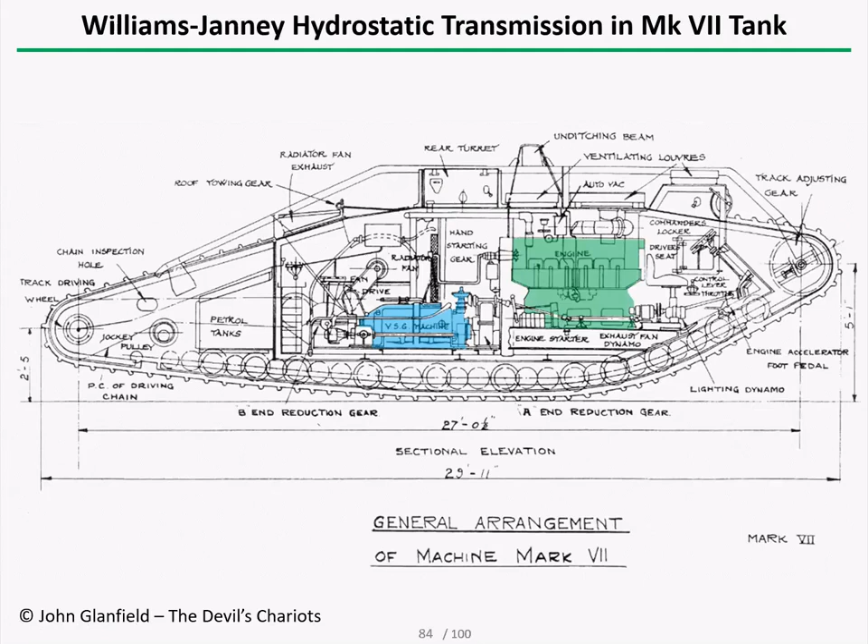So it was a bit hit and miss, a bit jerky. But the variable speed drive meant that you could just slow one track relative to the other, so it became much easier to steer the tank. It could be steered on the move as well, and was therefore a great improvement over just a straightforward mechanical drive. So you had two pumps operating from a power takeoff from the petrol engine, each one driving a motor on the tracks of the tank.

So as I said, it was a technical success again, but it came right at the very end of the war, so it wasn't developed in any sense.

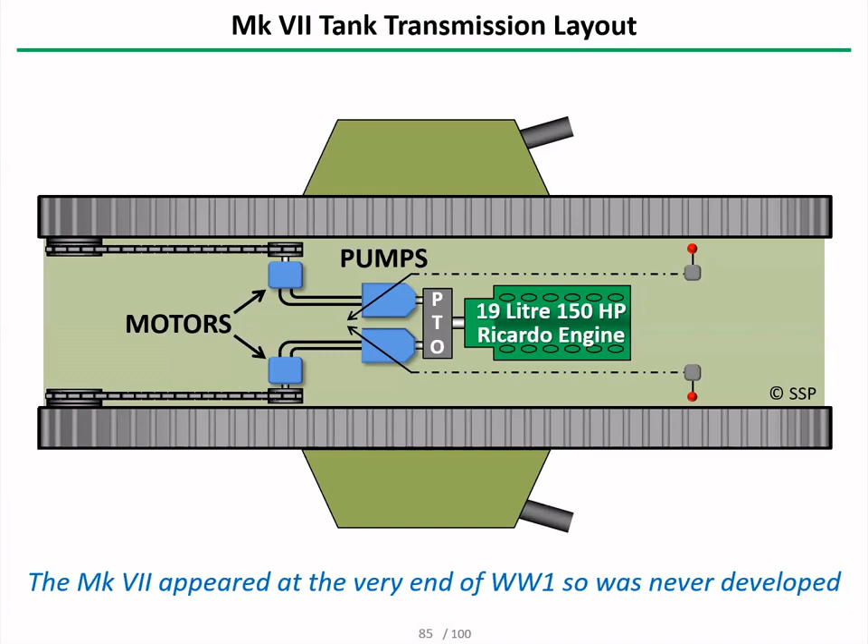Man lifts, or scissor lifts, or cherry pickers, whatever you like to call them - these again are a typical application for hydraulics, where the drive, the wheels, and also the lifting cylinder itself is hydraulically powered. These days, they're full of health and safety equipment to stop people falling off, getting their arm trapped in the scissor arms, or crashing down to the ground. But it wasn't always that way.

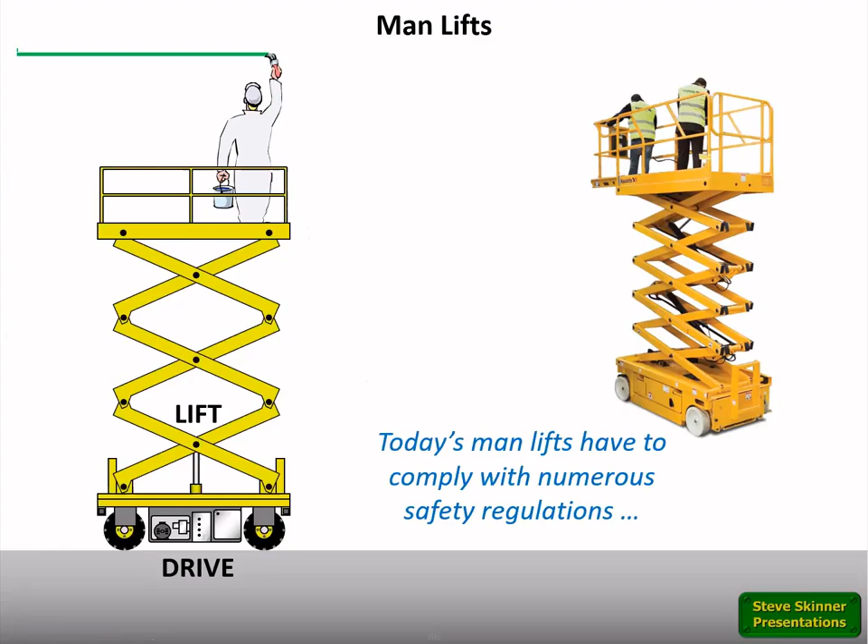Going back to the early 60s, the first man lift, as illustrated here, was just basically that big telescopic cylinder and a hand pump. So health and safety in those days wasn't quite such the consideration that it is today.

Those sort of machines required valves to be operated remotely. So this saw the advent of what we call solenoid operated valves, where instead of a guy grabbing hold of a lever and pushing a spool across in a valve manually, they mounted electrical solenoids to the end of the valve so that it could be operated just by flicking a switch.

If I can get the thing going backwards and forwards - yeah, just by opening and closing the electrical switches to the solenoids, you can now control the valve and therefore your direction of flow remotely. So these were the early solenoid valves appearing in the 1950s and thereabouts.

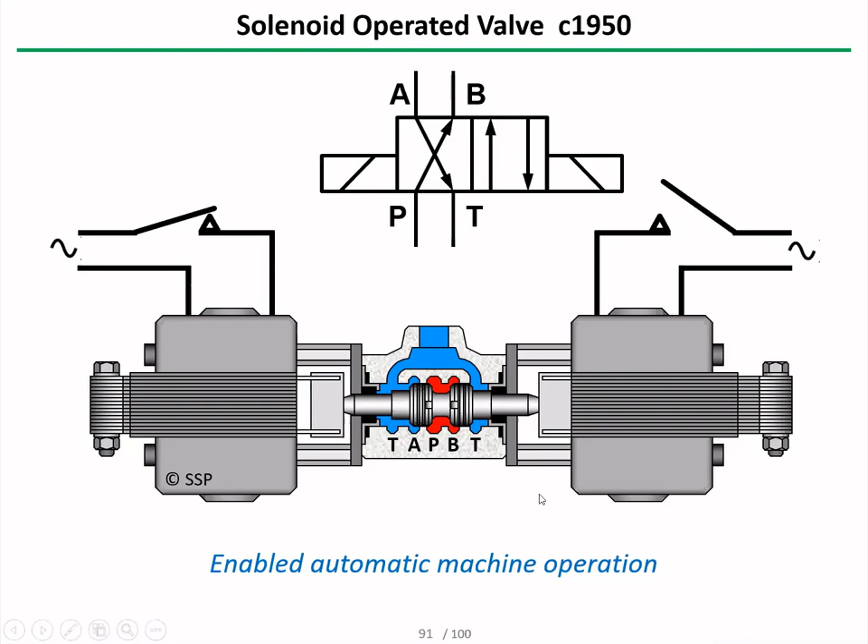They're a bit more sophisticated today, but basically it's still a spool moving within a body to control the direction of flow. But now they have a lot of built-in electronics to provide much more accurate and sophisticated control over the flow, and they've got built-in sensors to sense the temperature and pressure of the fluid and so forth. And they may have complete axis controllers built in as well these days.

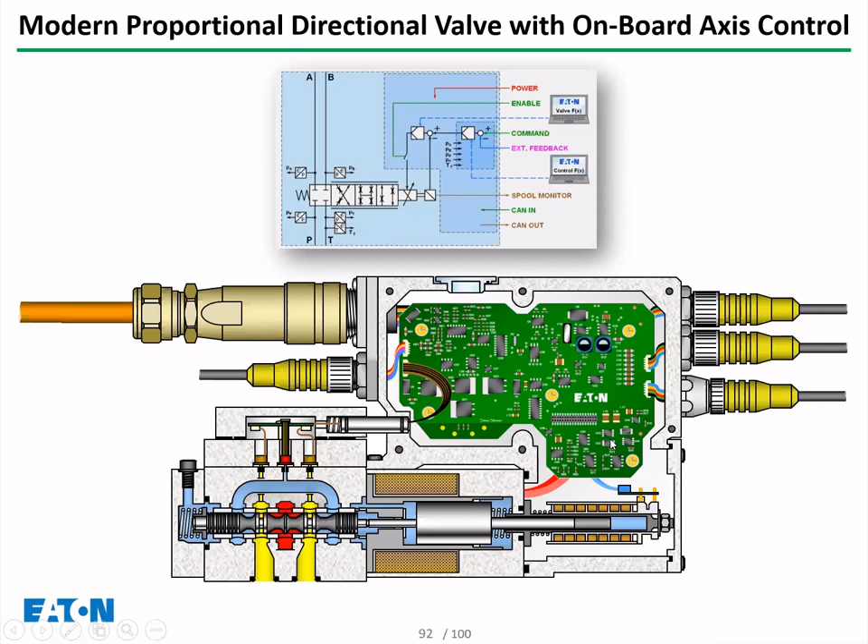So again, you can do all of your controlling built into the valve. You don't need separate electronics to do your closed loop control - it's all built into the valve itself. You just need a PLC or something like that to sequence it, tell it when to stop and start, and the valve works out all the movements for itself.

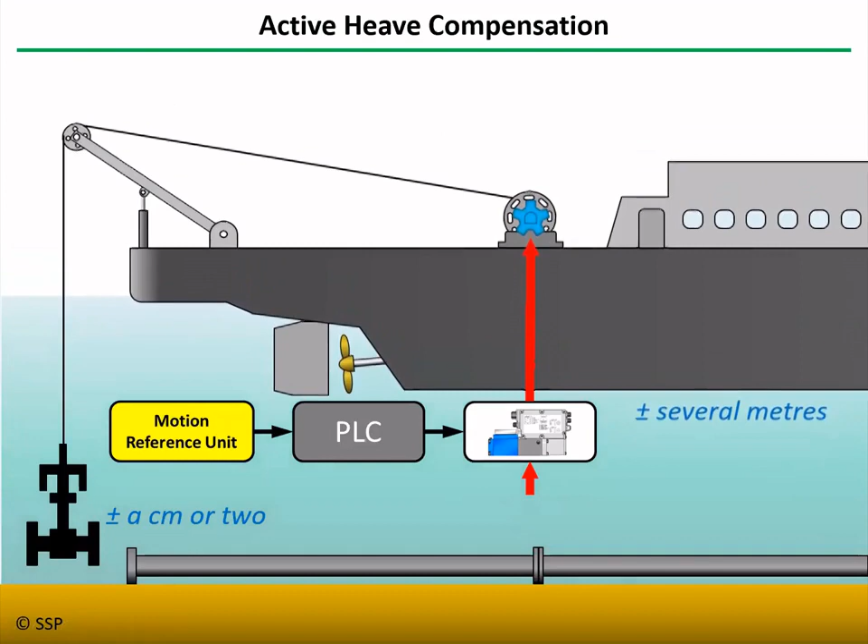So we've come a long way in the last 226 years, from Bramah's 1.5 ton hand-operated book press to the 80,000 ton die forging press of today. One just wonders where we will go in the next 200 years.

So there we are, 200 years of history in an hour and 3 minutes. Hopefully, apart from a few snags on the technical side, it's been of interest.